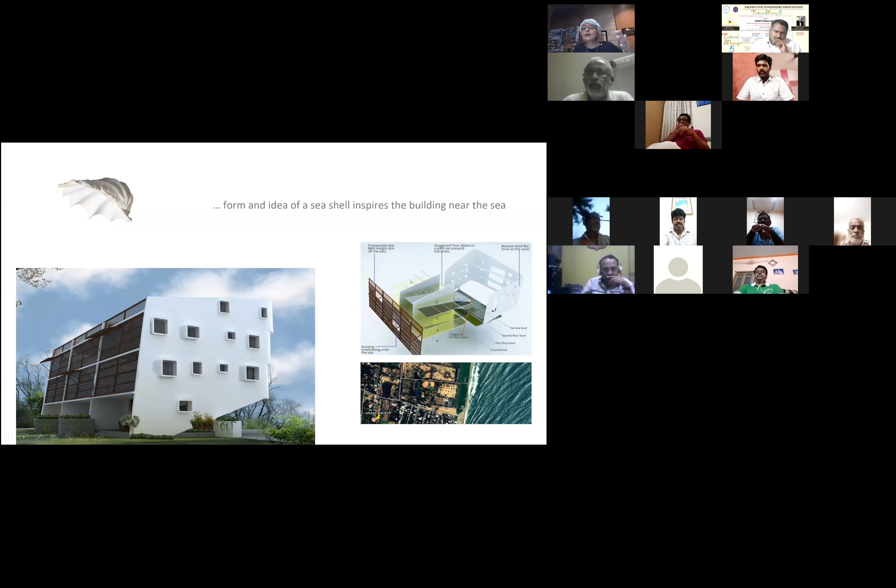That's the idea—in a seashell, from three sides, it gives the correct amount of light and air required, but the pearl inside is saved. Similarly here, we made a building with three sides; from the south and the west, where we get a lot of sun, we made the masonry with small windows. But facing east, which is the beach, we made a lot of glass where we get the sea breeze and everything.

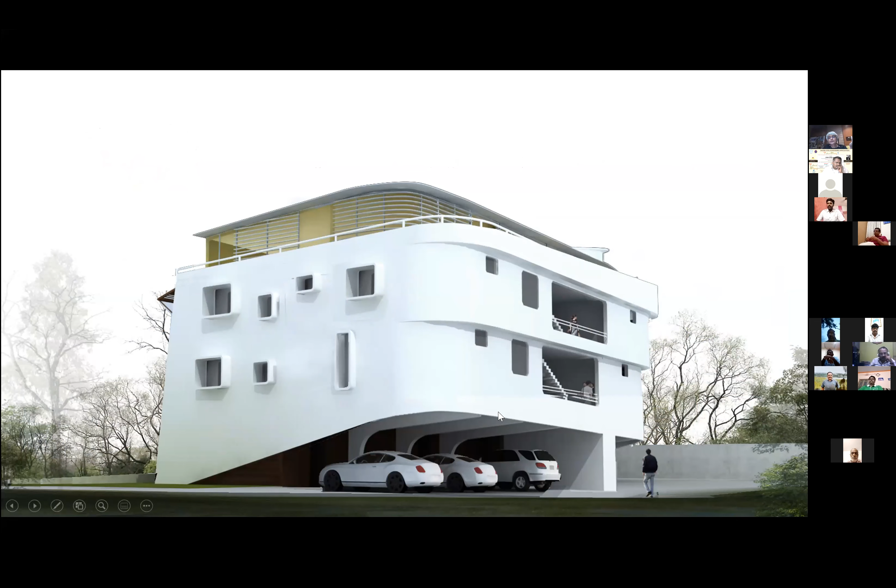To make that happen and give this feel of a shell, it was very important for us that we do not have a column at the end. That was a challenge we created for ourselves, and we wanted some part of the building to just cantilever. In this 3D model, this column is here, but the column didn't happen and we cantilevered the portion—that's something which actually gives the spirit to this building.

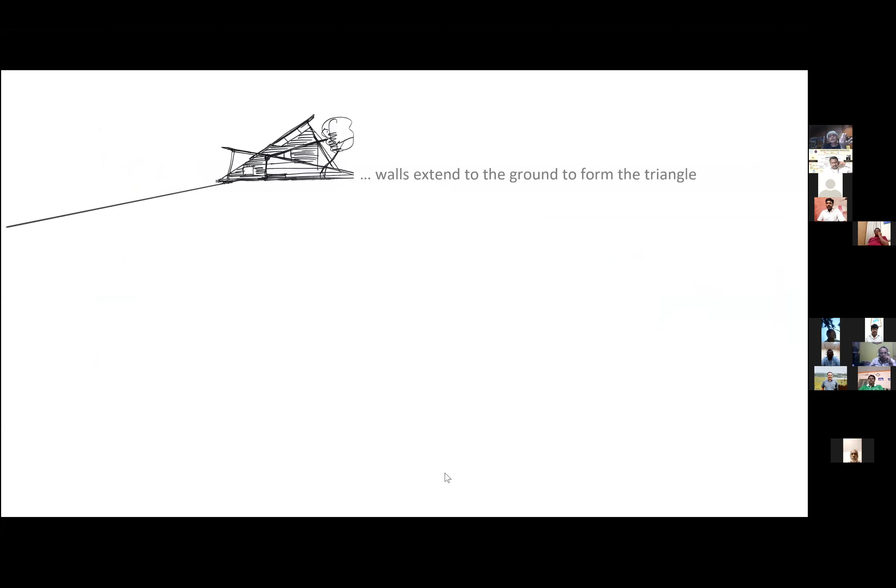This is a small house we did, like a farmhouse—a simple house with a traditional setup, masonry walls and a light roof. Traditionally we had a thatch roof or tile roof, but here we did it with a roofing sheet. What we did here is extend the walls and complete that triangle, so it got a new form.

Today it's like—we call it House Triangle, it's on our website. Every semester I interview students when they are joining our firm, and we completed this 15 years ago. Every student tells me, if I ask them why they want to join Maya Praxis, they only talk about this project. I don't know—I think it just still has that quality which inspires young students.

This is another project—we did a competition for the Indian Music Experience, a museum of music. In a normal project we would do standard grids—grids are very important to us—so we took the idea of doing a different grid. We divided the site into seven parts, like sa re ga ma pa dha ni sa. Then, like a musician chooses what raga and which note to pick, we made a lot of combinations and picked one grid, which inspired this plan and then the shape. That's how the design happened.

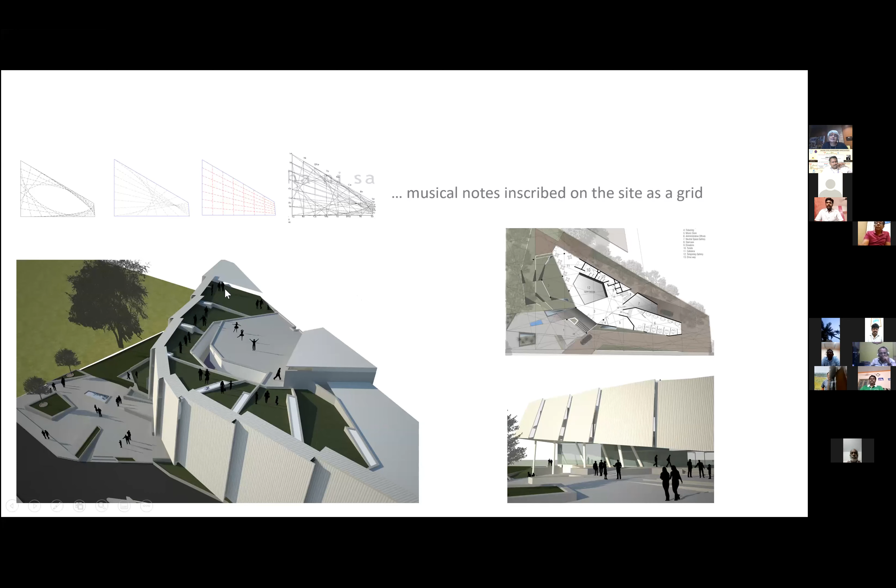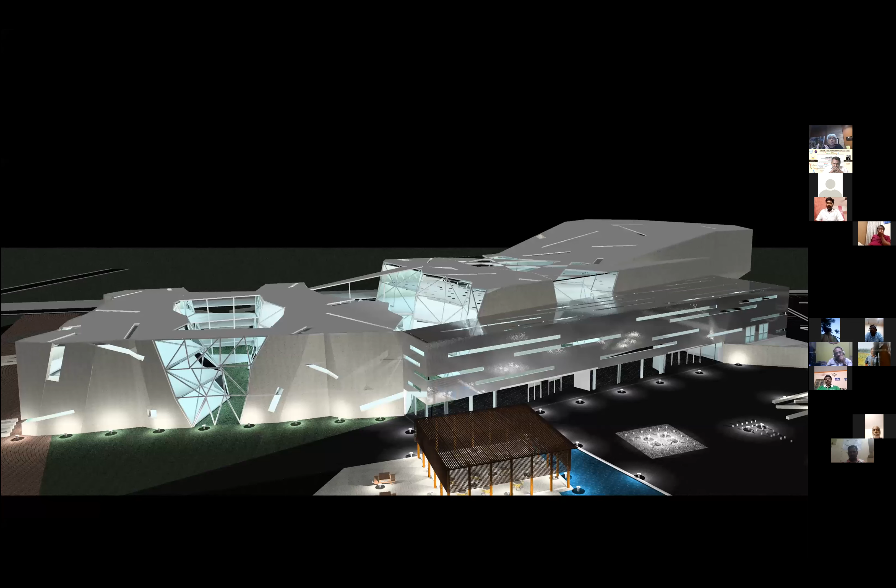This is another competition we did for a lighting museum in Bangalore. Here, what we did is get inspired by the geometry of crystal. Because it was a lighting museum, and light had to be celebrated and come alive in everything—through material, structure, function—we got inspired by the geometry of lighting poles we see in our city, which for us matched the geometry of crystal. We designed this museum with three crystal courts, but overall the whole thing was inspired by that structural geometry, and that's what made the design happen.

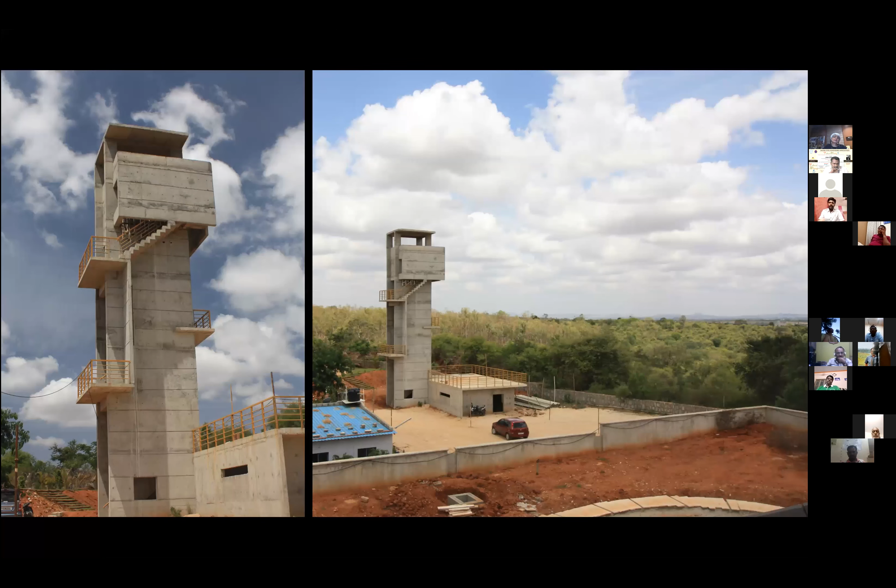These are two water tank cum watchtower structures which we did in concrete. Just simple shear walls, with steps to go up where there is a water tank. This was for a large house where we also gave access to go on top of the water tank, so they could go up and look at a forest right next to the house.

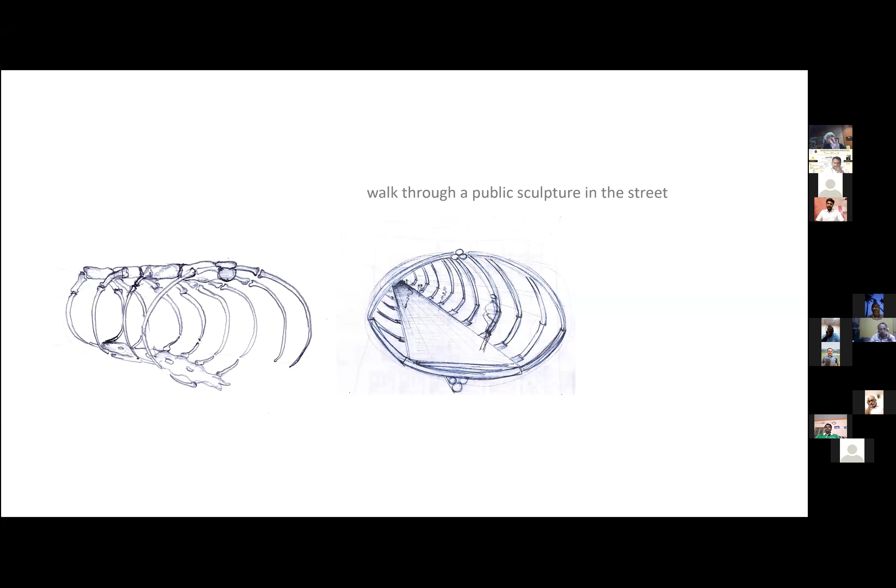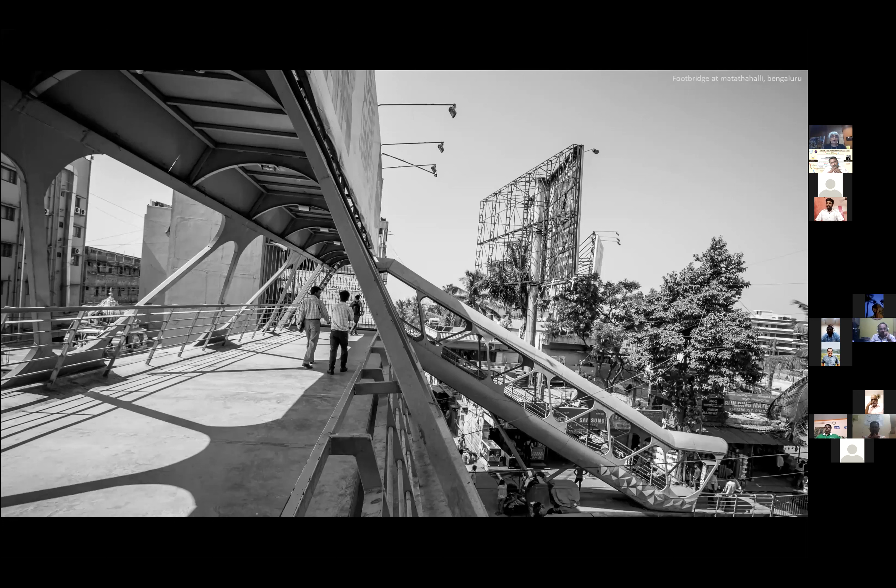A lot of these foot-over bridges cover the sides with hoardings. Here we convinced the BBMP and the client making this that we would take the hoarding up above instead. So what you see above here is the hoarding, and then all these different bridges have different shapes - this one is triangular, the other one more diamond shaped. These are the different geometries we made, and it's also about how the person experiences the light and shadow that forms on it.

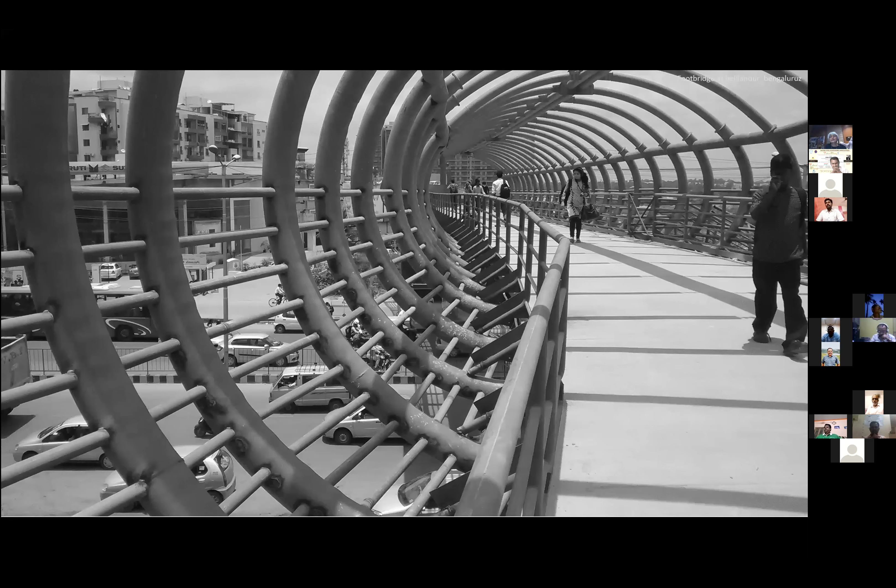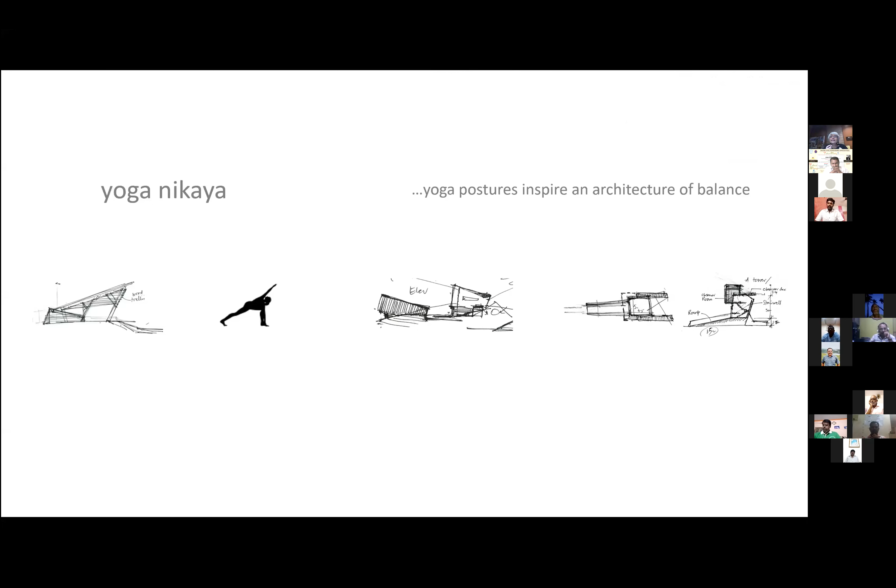Now I'll explain this project a little bit more in detail. This is actually a yoga place called Yoga Nikaya. It's a wellness retreat where people go to learn yoga and do meditation. Here too, our idea was that the structures are inspired by the yoga postures.

If we stand, that's the most stable structure - like most buildings, when we are standing, the gravity is all vertical. But in a yoga posture, while doing yoga, we have to find that fine balance, which needs a little extra effort to be balanced. I think most of our buildings here took that idea, and the angles and planes we worked out in this building are inspired by that. One of the buildings is actually inspired by the Bhujangasana.

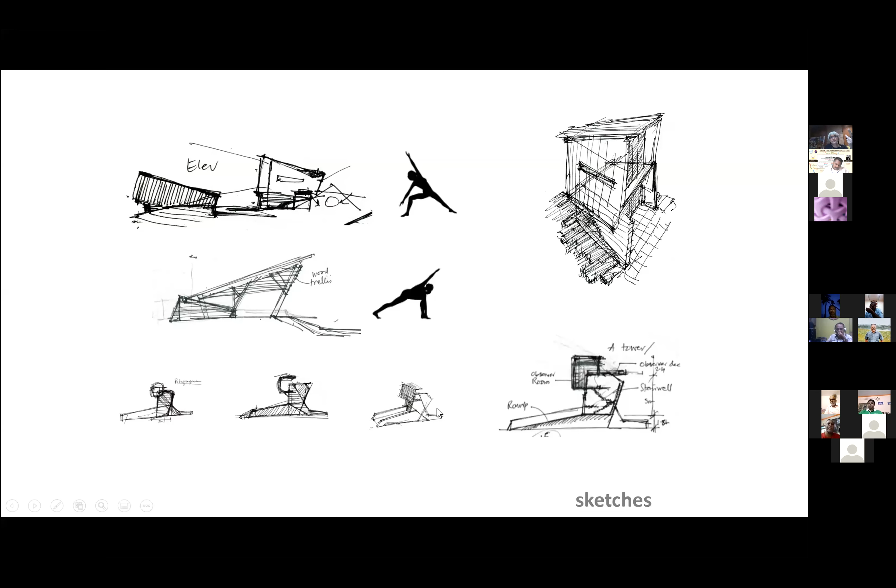So in Bhujangasana, with the legs back, hands front, the person just looks up to the sky. That's what translated into a building which is like an observatory. It became almost literal. We were looking up at the sky, and there was a telescope the client had put up, and there was a watch tower, kind of a water tank there for the whole campus, and an observatory on that. So that was inspired by Bhujangasana.

And it's a wellness retreat where people come for rejuvenation of body, mind, soul. Like 7 acres of land with all fruit orchard, flower orchard. We took only the area which had no vegetation, we left the farm as it is. We made a compact design where we had a plaza with meditation hall, yoga hall, reception, few cottages, like 8 cottages along a street, dining hall, and that observatory.

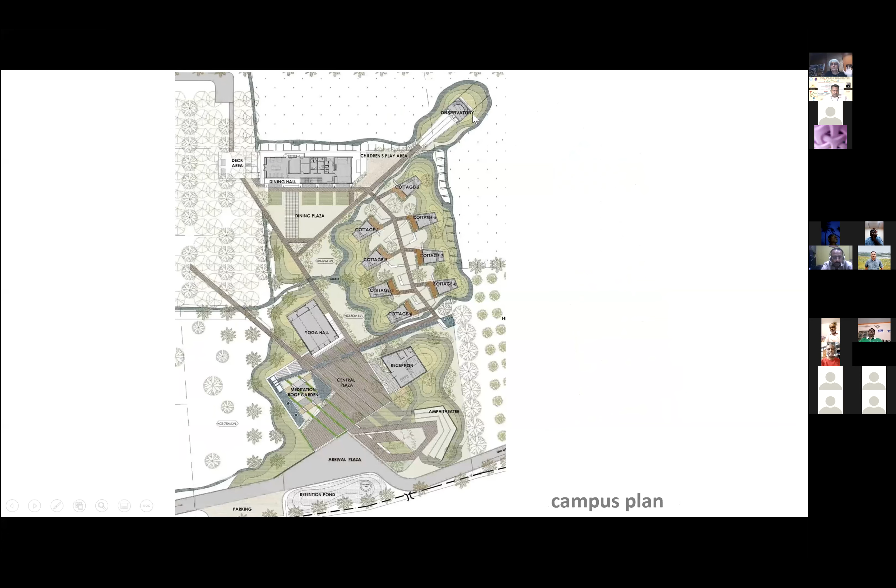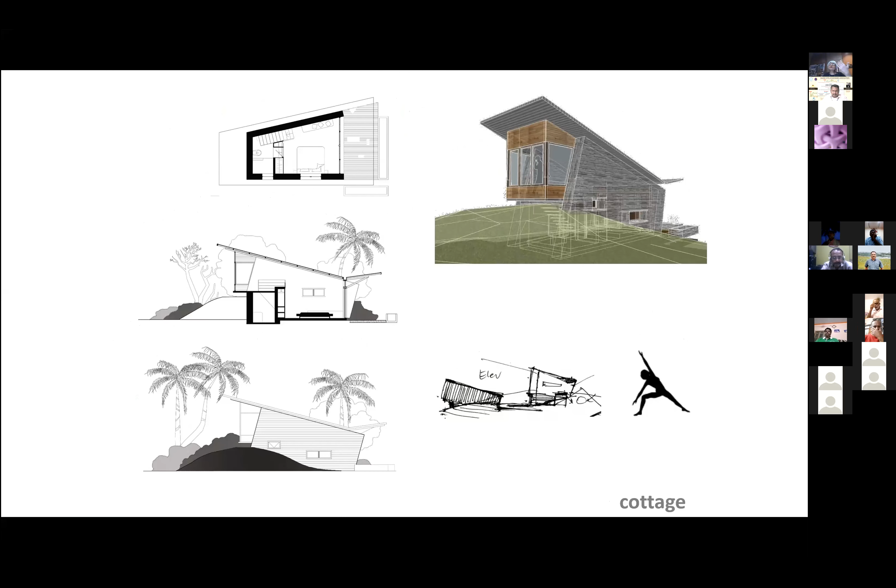So here, if you see, most of the buildings we designed have 2 side walls which are the masonry walls. The other 2 sides are in wood and glass, so that's where the light comes in. And the roof is, again, roofing sheet.

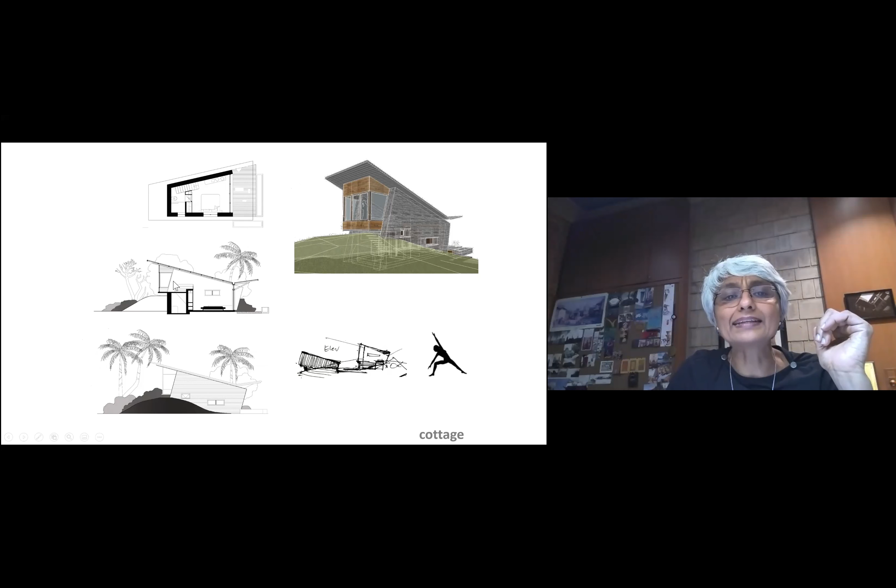This is the cottage where we put the toilet at a lower level, and with less height we had the bed, and then above the toilet, with a ladder to go up, we gave a space for somebody to do yoga and meditation. That's what that cottage is.

And we created a mound so that from the other side, you don't feel that high height. That's the street, how it sits in the landscape, all the cottages.

The yoga hall - here again, we know we have to face east while doing yoga, so it was aligned with the east-west direction. And we did these 2 masonry walls, but the inside, being a large hall, we wanted a full column-free space. So we designed these steel columns, these column portals, which made the space completely free. And this is, I think, the closer view without the roofing sheet of the structure.

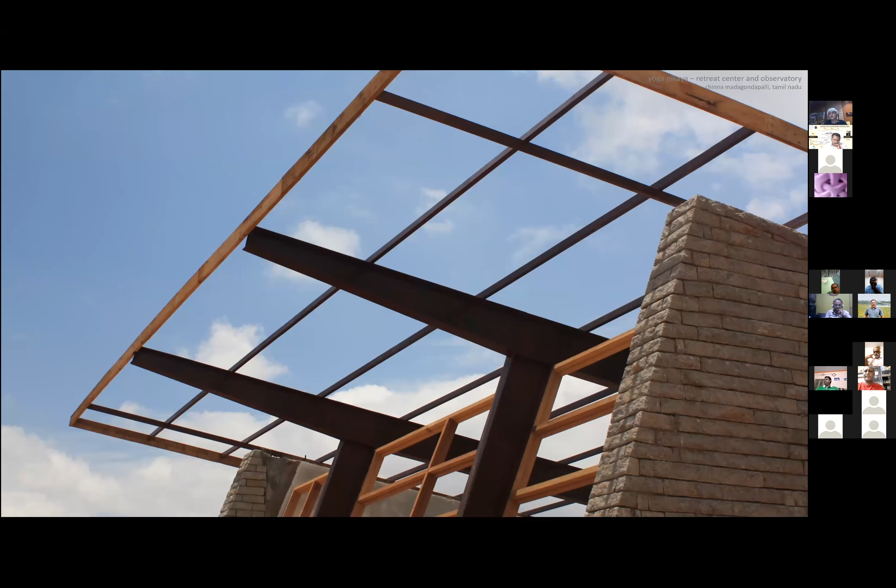And that's how it is, where the side walls are in masonry. And if you see what the stone is, it's actually a composite wall with a concrete block inside. The outside is this chapri stone, like pillars used for fencing, which was available in the area - this is near Hosur. We just used that as masonry, so it's a composite wall. We didn't want to clad it, but we made it a composite wall.

And that's the space from inside where we have this beautiful Kadapa stone flooring, polished. And being a roofing sheet and being in a hot climate, we had to give insulation, but we used this packaging wood - you know, what you get deal wood in, in kgs. We used that with plywood, and then we put these small pine wood reapers, and that's what became the ceiling here.

The reception hall - so all the language, all the buildings followed the same language, and all of them we did this kind of butterfly roof. So the roof, normally we'd see the roof is like this, where the top goes up. Here, what we did is all the buildings had the roof like a butterfly, which made the rainwater harvesting really easy, because we had one point where all the water comes, and from there we collected all the rainwater and recharged the thing. I'll tell you how that works out.

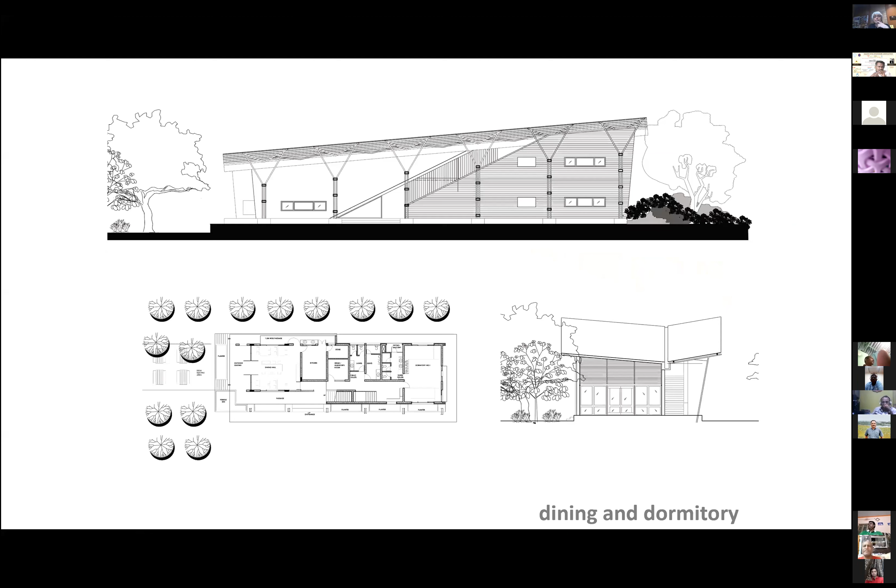The interiors, the dining hall building - so this was one of the larger buildings. We had 3 dormitories and a dining hall, where again we designed the front of the thing with these thin columns, which support that roofing sheet up there.

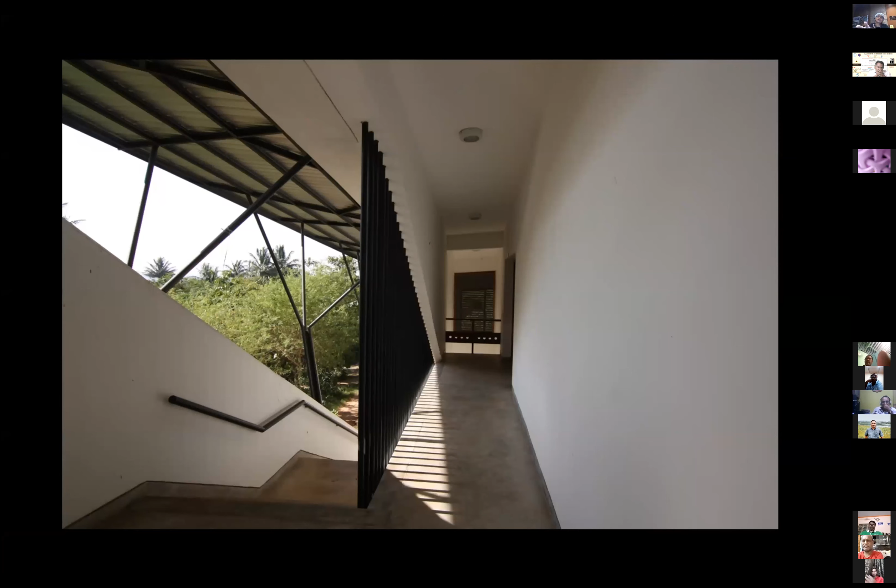So here what we did, what you saw, there was a stone wall and a white wall, and in between we put a staircase inside, and that's what separates those 2 walls.

This is the observatory cum water tank structure. So there was a water tank, and we didn't want separate different water tanks on these separate buildings, so we had to just create one large separate structure where the water tank could be placed. And that's what this is.

So when you enter, there is this staircase which leads up there. This is the water tank placed. Then we made - and later actually, which is not shown here, an observatory got added there. So that's what, and 2 shear walls on the side which support the water tank. With the steel structure, we had to strengthen it when we added the observatory at a later stage.

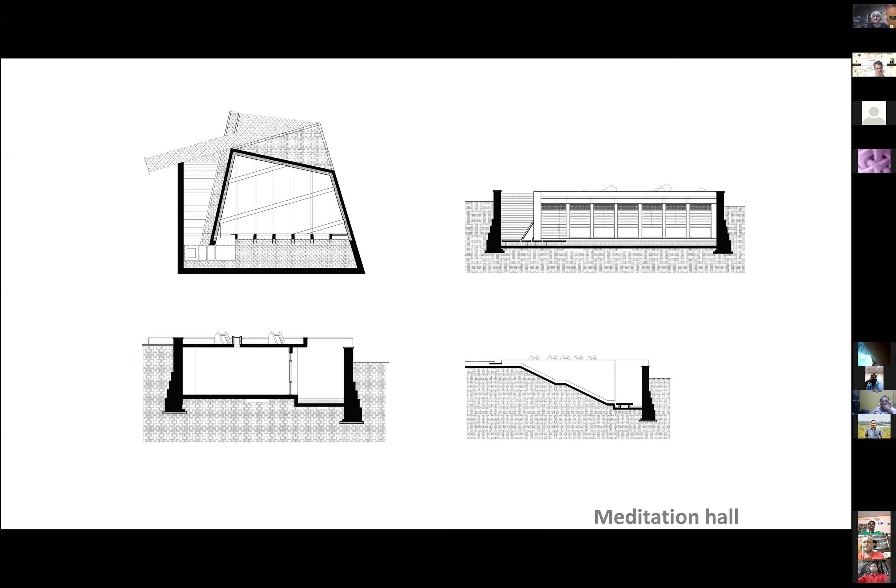That's the meditation hall. We purposely put it underground, because when we do yoga, we want to connect to the world, the sun, sky, everything. But when we want to meditate, it's about internal reflection. We want to feel and reflect inside of us.

So we thought we will take the person doing the meditation down underground, to a space where you go away from the world, and there you can reflect on your own thoughts. Slowly those thoughts fade away and you're in a different state, like a trance. That's the meditation hall.

Most of the projects we do, sustainability is very important to us. When it comes to using local materials and local technology, we try to do that. This project is one good example.

This was a farm when our client took it; the water used to come from the nearby village and they had to pump it up. What we did is a full, proper rainwater harvesting system.

There was a drain where water from the village was going right next to our property. We created a bund there and collected that water, which was still flowing toward the lake because of the site's location. Then we created channels like bioswales with recharging pits at regular intervals, directed to the bore well. Within 3 years, they became completely self-sustainable in water.

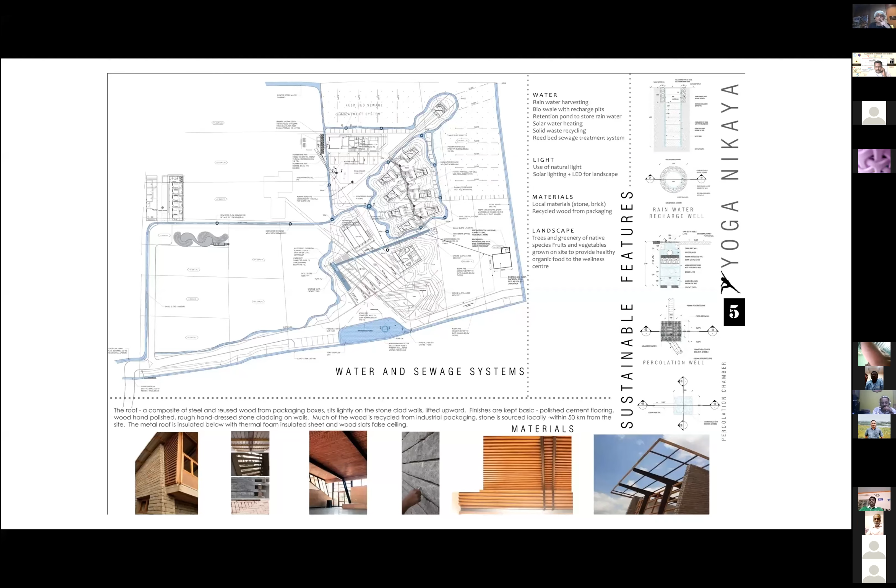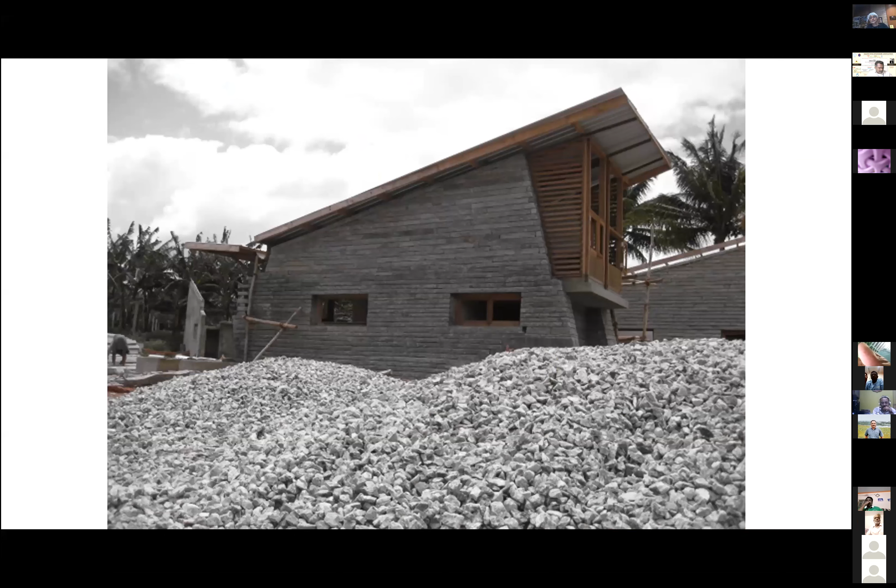Some of the projects under construction - as architects and engineers, we love this stage where one can see how many possibilities we have. It's interesting, the same material you see here is the same material you see on the finished building there. This is how the whole campus feels.

And finally, all these buildings come alive when they are used and enjoyed by the people.

Another project I want to explain is a swimming pool building for a school, Aditi Mallya International School. Here again, it's a steel structure.

Because it's a swimming pool building, we took the arced position of a person diving into the water - the swimmer's position - as inspiration, and designed the structure around it.

That's actually the elevation. And that's the covered pool, the finished structure.

What we've done here: it was a 22 meter by 32 meter span, one hall which we had to make for this swimming pool, a 6-lane pool.

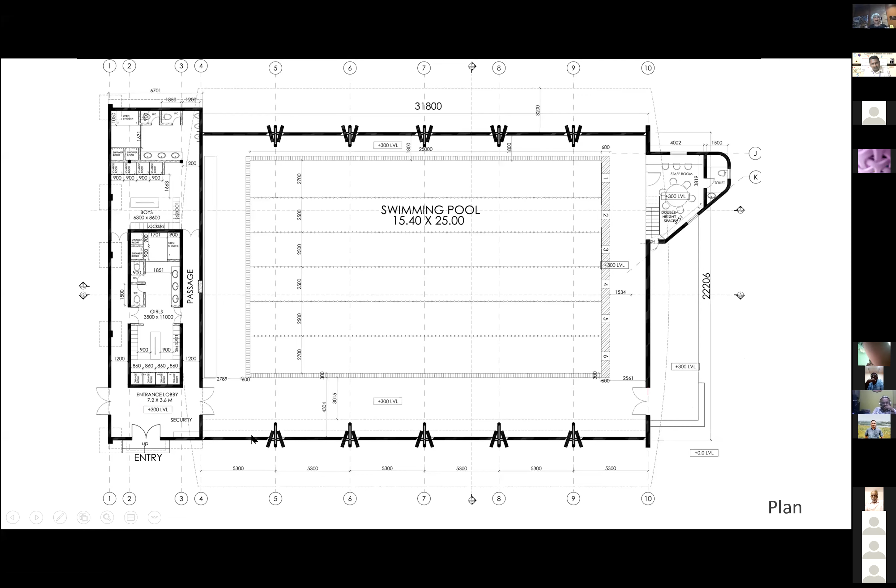To achieve that, the walls are at an angle, and we designed these two split columns you see here. That's also inspired by a person standing with hands up, ready to dive - so even the design of the column got inspired by that, with the split there.

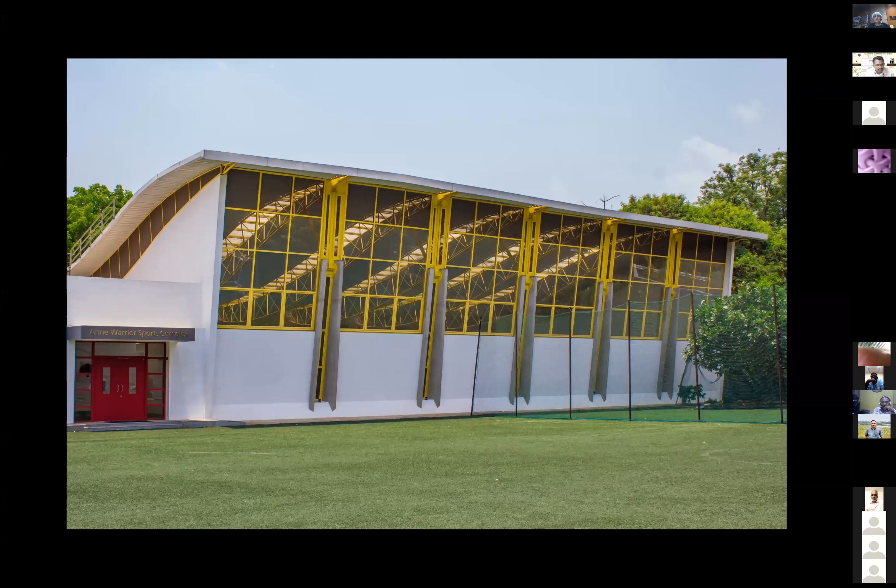That's how it looks in reality - the elevation - there was a field there, so we had to give this wall so dust would not go into the pool. But the split helped us create a slit where air movement could happen at the level where people were swimming.

Above, we gave mosquito mesh so ventilation could happen, but up to a certain height we gave glass so dust wouldn't go in. What I'm explaining is, when it comes to climate and making the building inhabitable without using much energy, we try our best to work it out with the structure.

This bow-shaped truss was designed because of the swimmer's position. The 22 meter span we took with this bow-shaped truss was worked out based on how it sits on these two twin columns.

We created the skylight, which celebrates the bow-shaped truss - it celebrates the light, celebrates the structure.

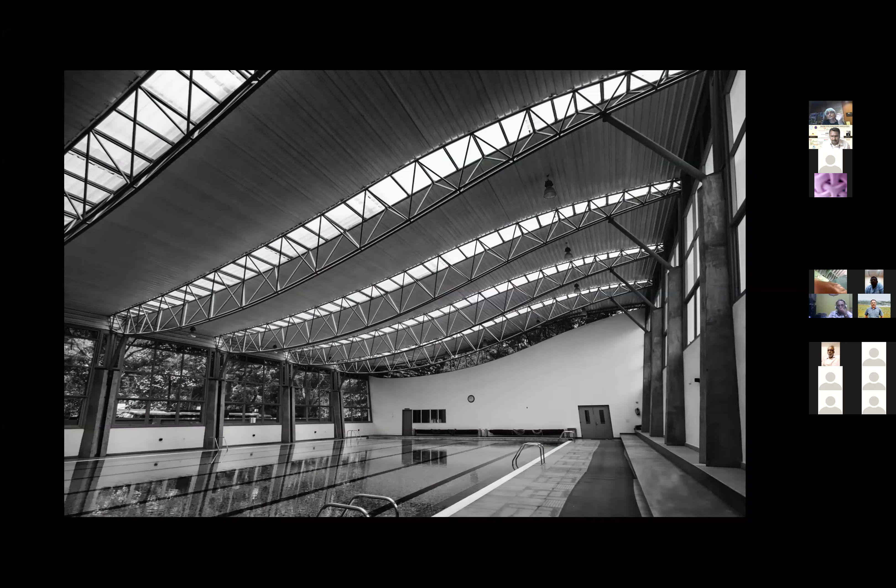Being a swimming pool, we wanted it heated. In Bangalore, for a school, they want to teach swimming all year round, so they wanted to use diesel. We said no, we will do a solar heated pool.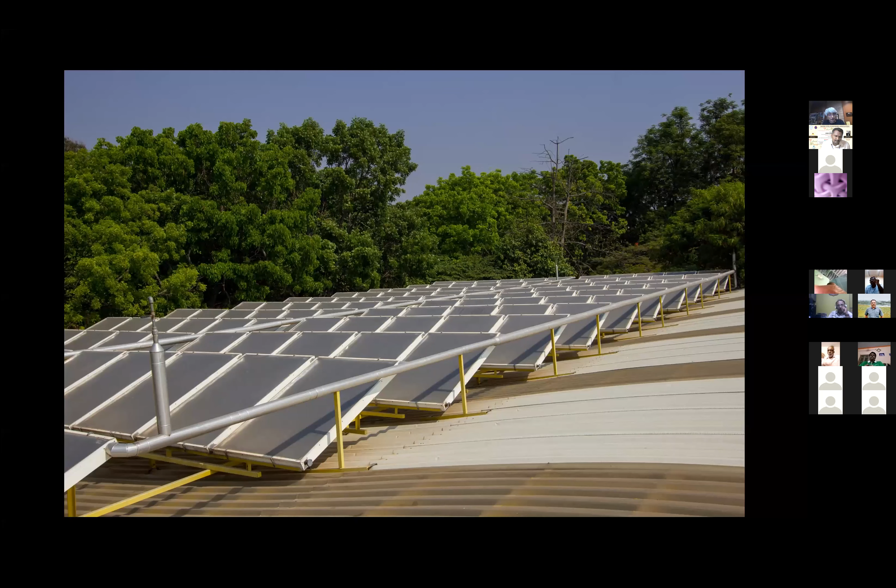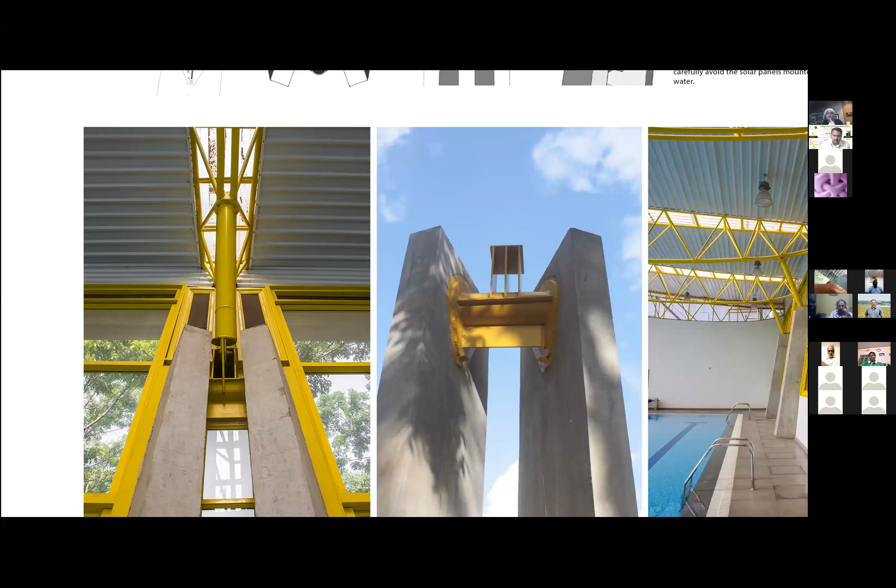For a school like this, we did 120 panels for that whole large system, and we had to work that out with the bow-shaped truss to take another structure on top where the panels could sit. We wanted the columns to stop at a certain height, with a steel structure taking over above, making the structure look lighter.

Otherwise, going these columns all the way up, they look very heavy. For us, we had to design this joint. We designed with the structural engineer how the whole load from those trusses comes to this joint and then gets transferred to those 2 twin columns. When you have to design like this, we do really detailed drawings to make that happen.

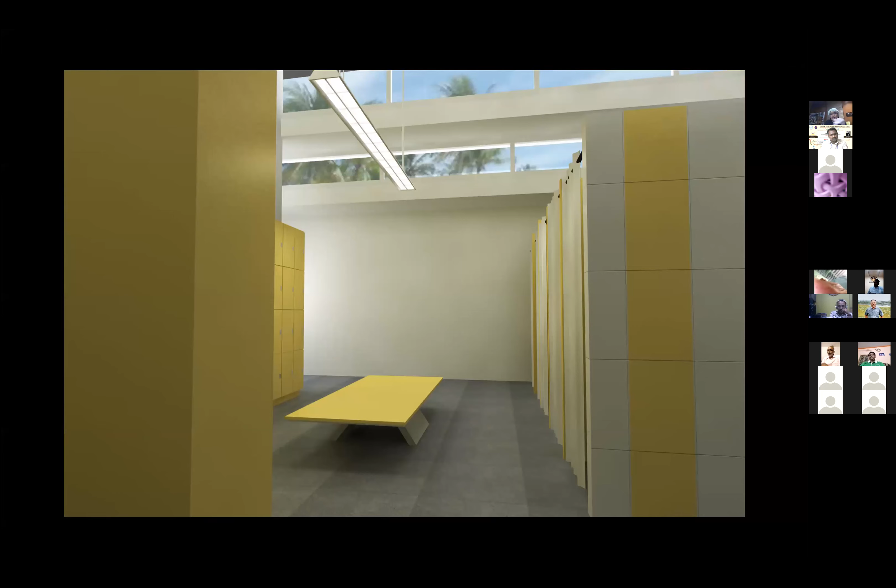This is the change room, which we did along with the pool. So yes, I think for us, if you ask us, the client asked us to do just a shed for swimming pool. But why can't a shed be beautiful architecture?

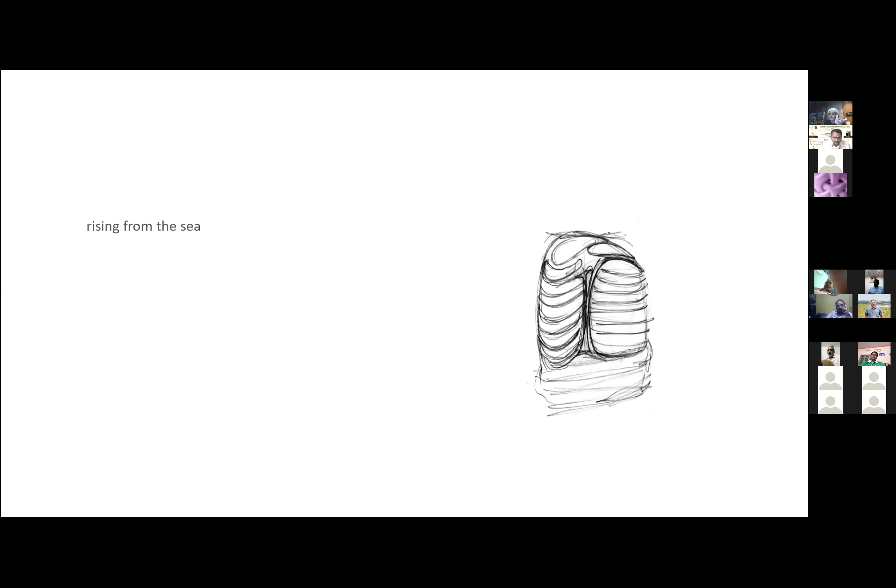This is another project what we did. This is in Bahrain, a 4-star hotel. Bahrain is an island, so we again got inspired by the sea creatures there. And the client said, we became these foreign architects, like how in India we have architects coming from Singapore. So for Bahrain, they said, we are getting an architect from India.

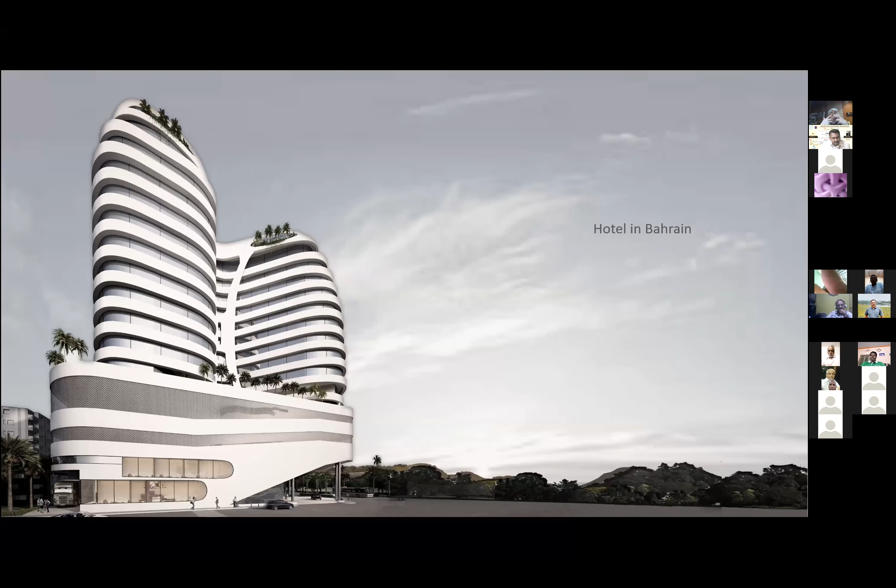We want an iconic building which looks very different from what the normal buildings in Bahrain look like. So that's the brief we got. So we said, okay, we'll give you an iconic building. And we designed this building inspired by that. We said we will do this free form building.

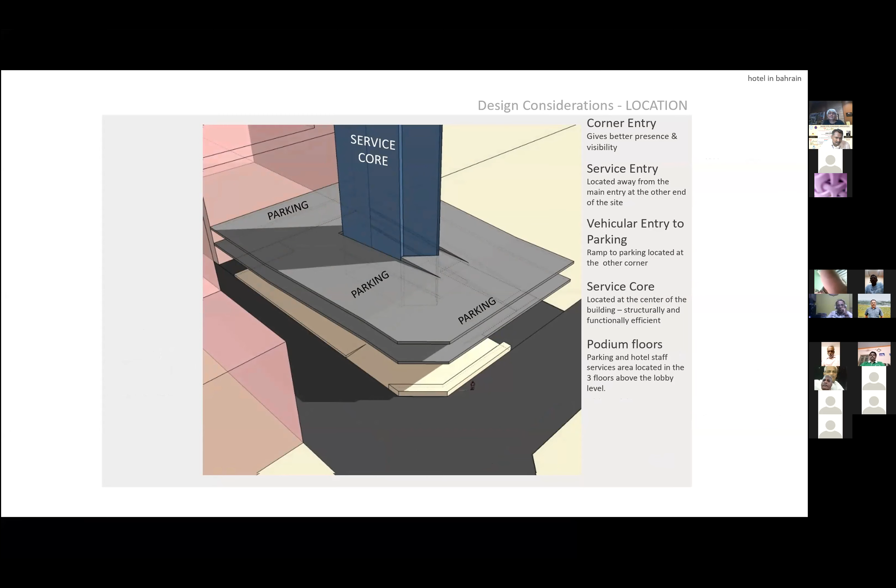And there it's like a downtown feel where you can build all the way up to the edge of the property. It's a small site, 20,000 square feet, where we did ground floor lobby, 3 floors of parking, then the podium with swimming pool and the tower.

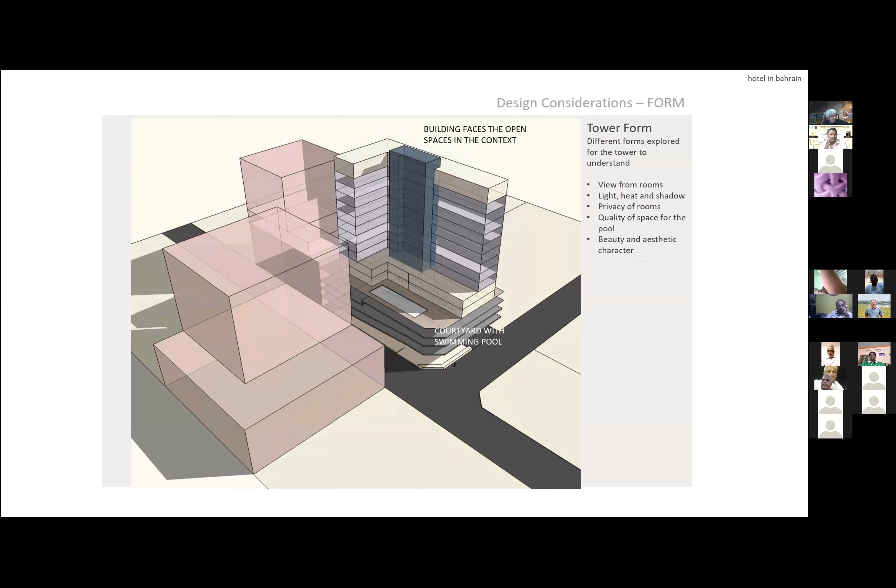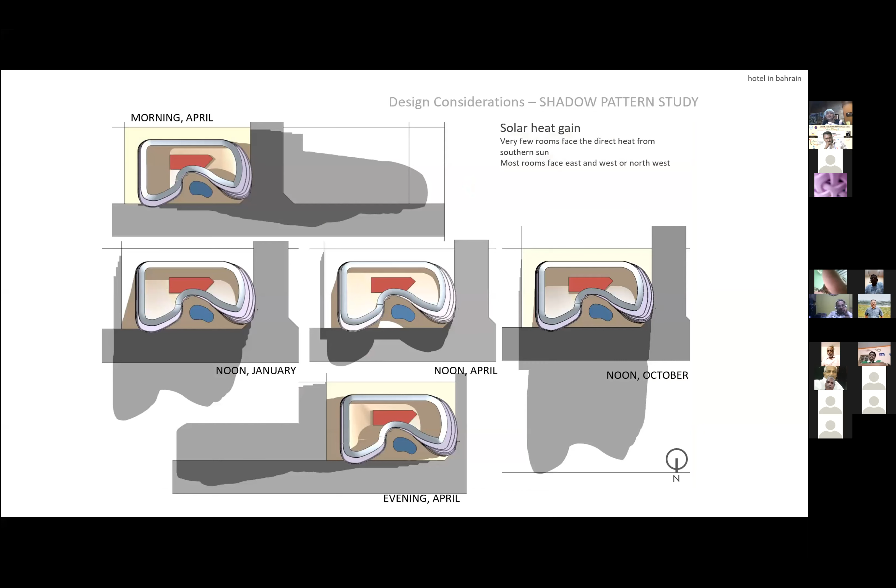We looked at different shapes to see what would work to give shadow to the pool, because there it's so hot, so the pool should be in shadow. That's how, after a lot of analysis, we came up with this form.

For us, this was the first time we were working in Bahrain, and we understood there we can't do a basement. It's an island, you're sitting on land which is really unstable. So the structure was all pile foundations, which went deep, and all PT slabs.

Completely, the whole structure was done in PT slabs. When we designed a building shaped back like that, we had to work out what happens to that column, how do we support it, and how many columns we have. Eventually, as these 2 columns went up, we made them slant in the last 3 floors to give us that shape.

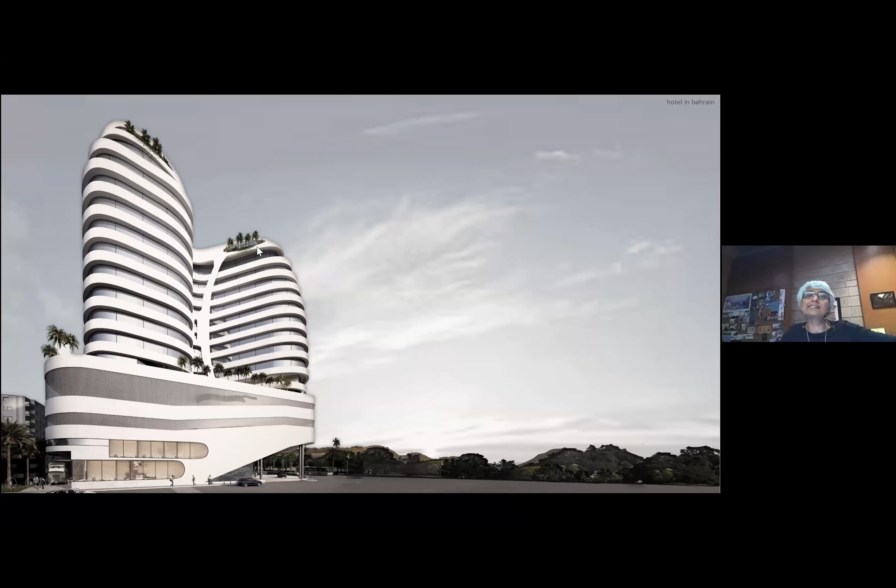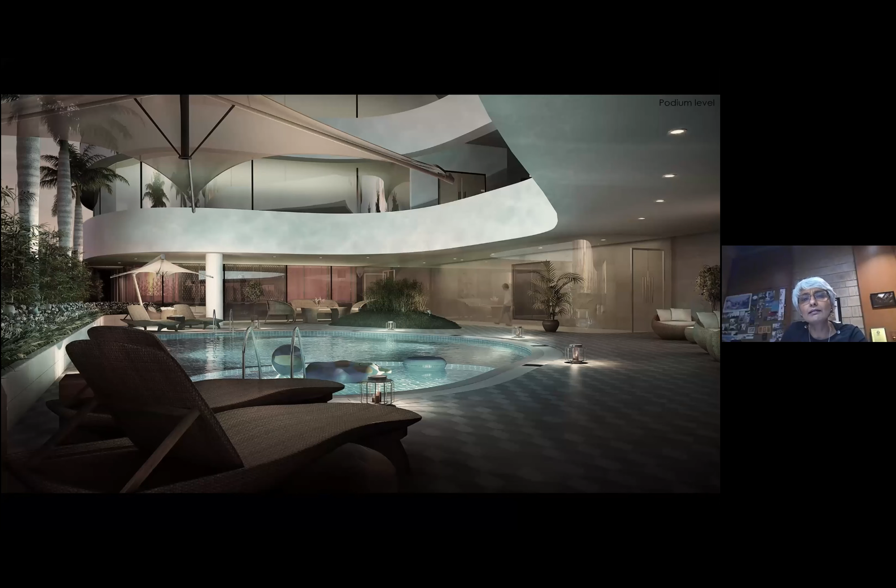So yes, that's just the lobby. And even the interiors, we do. So we also take the same idea to the interiors. We worked on what we do in architecture, trying to take the same idea and bring the experience to the interiors as well.

I'll skip this part. So even in interiors, there was a column in the middle of the restaurant. We said, okay, why not make a mushroom kind of thing out of it? And that's the finished building, what you see.

Even if you see what we did, most of the buildings in Bahrain, they'll be like this - there'll be no shelter. It's actually hot, 50 degrees, but very few do anything to shade the glass. So when we did these huge PT beams, which also worked out for the form, they also shaded the glass between the 2 floors.

This is one project, I think, for a developer. Here I worked with your members association member, engineer Satish. He was our structural engineer. And literally, I think we had a tough time.

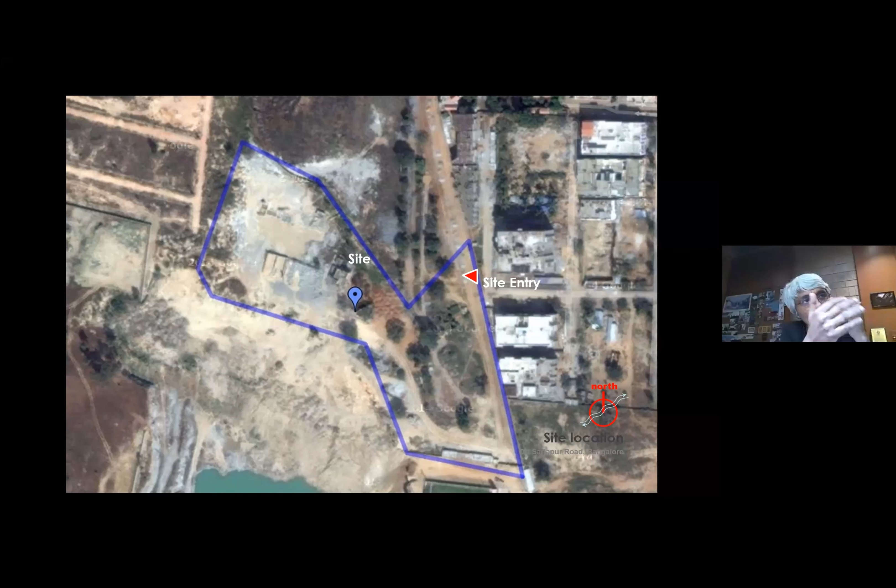It was a problem site because the site was a quarry earlier. I think when the developer took that site, he didn't know how many problems it came up with. Once we did the soil test and everything, there was a lot of filled up land - somebody earlier had filled up a lot of places. So along with Satish, we worked out the structure for this.

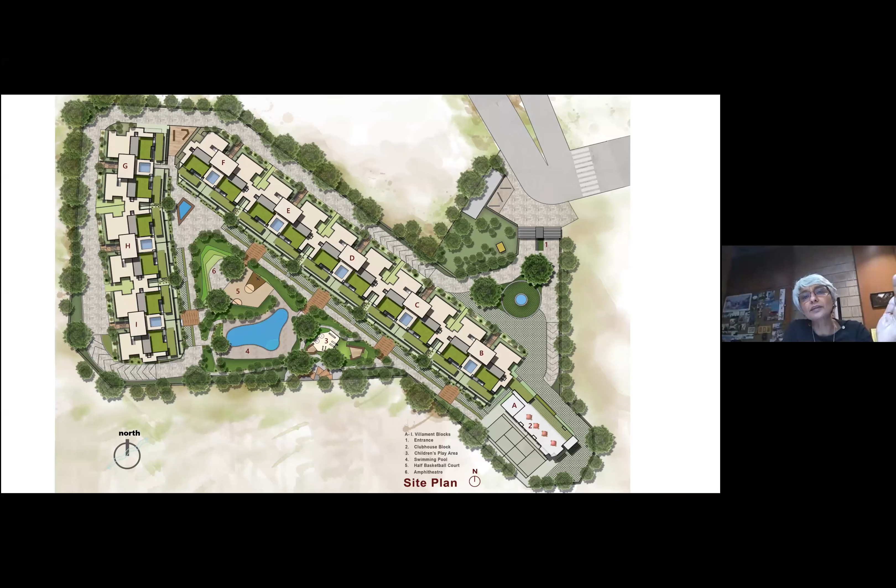The client thought he would do these towers because it was a very odd shaped site. We said no, we'll work out something where we'll actually do this 9-story building, which is a continuous building. He wanted duplex apartments, so we did these duplexes.

What happens if you do duplexes above like that is you'll get 1 floor with 4 doors, and then the next floor you'll get no entrance door. So we said no, we'll introduce 1 single floor apartment here, and then we will alternate, so we'll get the entrance to this side here, and the next floor would get that.

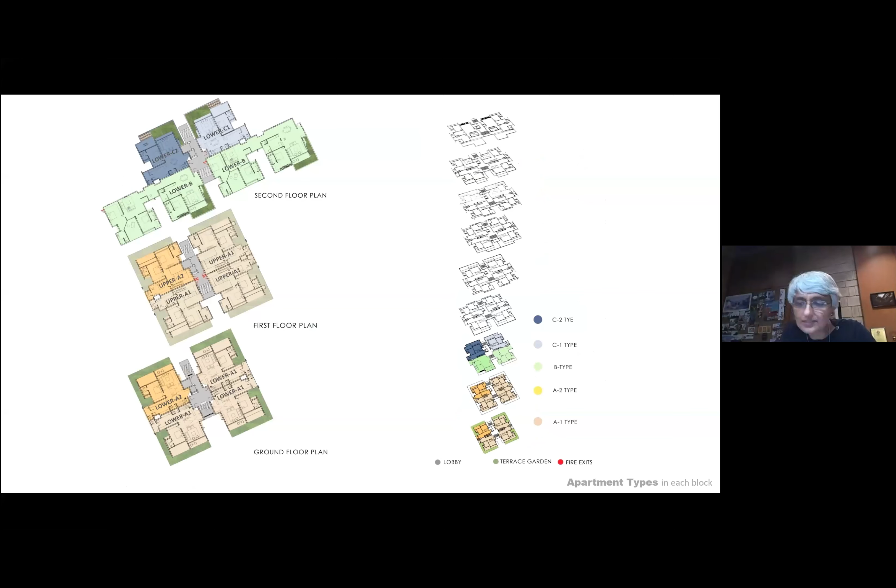I think Satish would have cursed us for doing it, because every floor became different. Typically for an apartment structural drawing, every floor had different beams, and there was a double height in every duplex apartment.

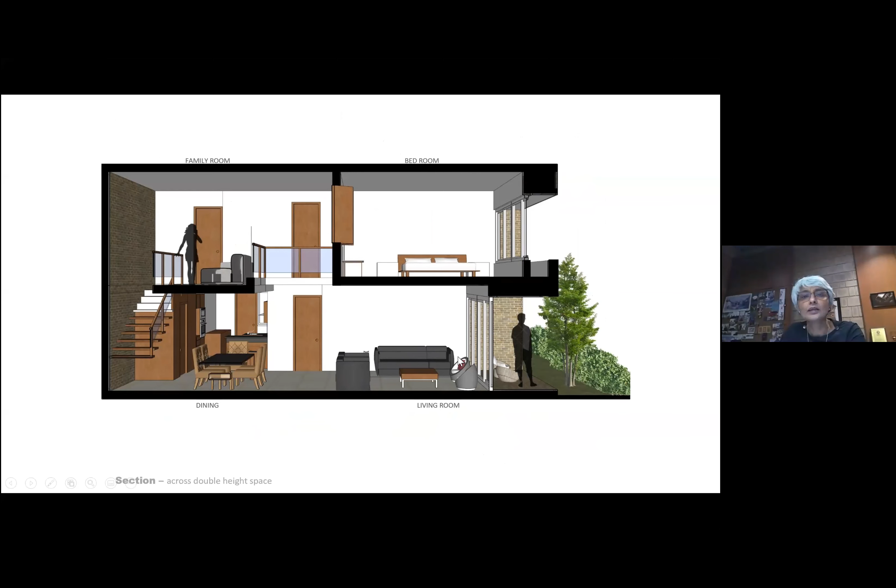So what you see is this double height, alternating in each floor. We introduced steel beams inside that double height so we don't see a beam there. I think we achieved a very beautiful apartment after that. We didn't want any drop beams which would affect the double height, so we introduced steel beams in this 9-story structure in the middle.

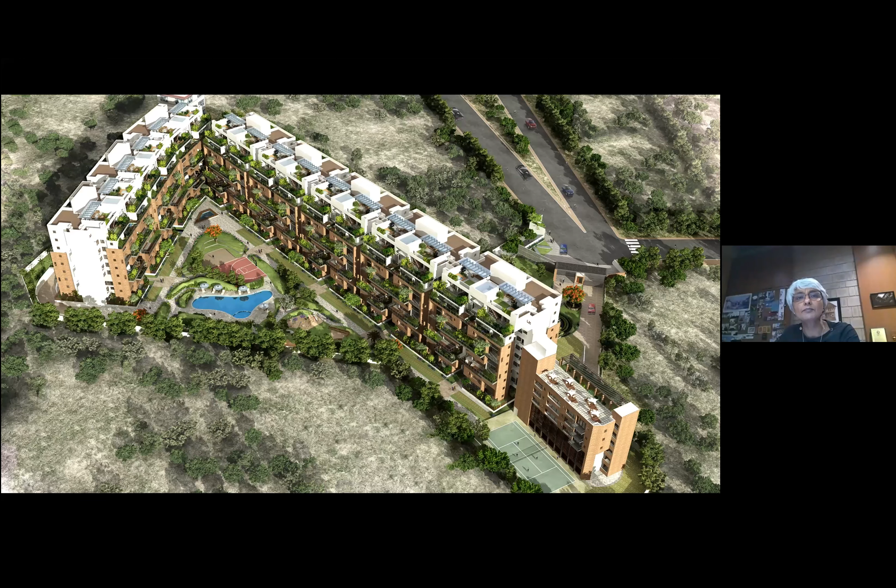And that's some of the 3Ds of what we did. The building had to recede back because the client wanted terrace gardens, so we introduced sunken slabs and a terrace garden to each duplex apartment.

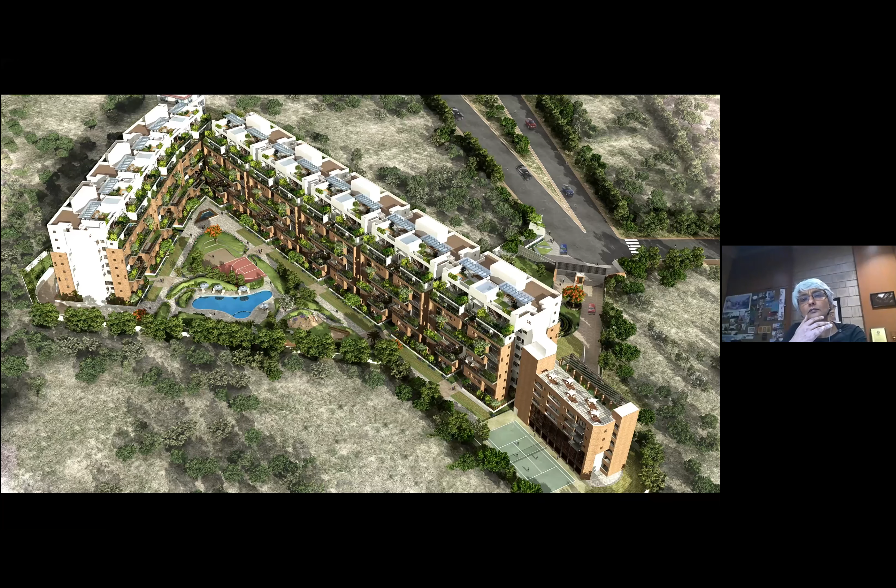Finally, when the building is built, the people who inhabit this space don't think about how much pain an architect or engineer goes through building this. For them, what matters is how the building is finished, what flooring or furniture there is, whether the toilet is functioning or not. But yes, we do have to make that work as well. There's a lot of work which goes into making that structure.

So this is how the building has come up. It's under construction right now. The structure is complete.

Now this is another multi-purpose hall we did, in Jalandhar, which is in Punjab. Brick is the material which is beautiful and used very well there; all the buildings are made in brick. So we wanted to make a brick building, but being a multi-purpose hall, we wanted to do a steel structure.

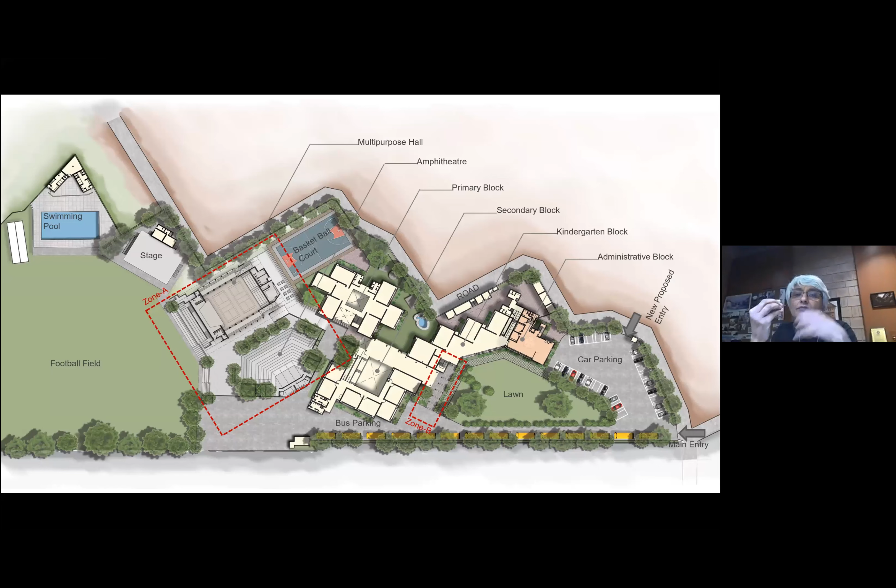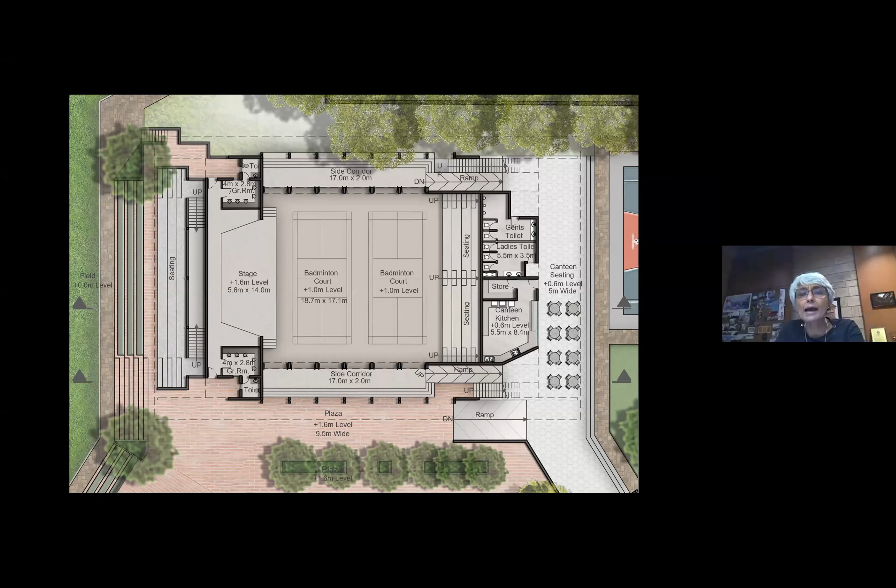So we decided to combine the two really well. It's a hall for a school where they wanted performances to happen, but also wanted it to work for badminton, chess, TT table, even judo, karate, and other activities which happen in school. So that was our first thing, where we worked out how many people could sit.

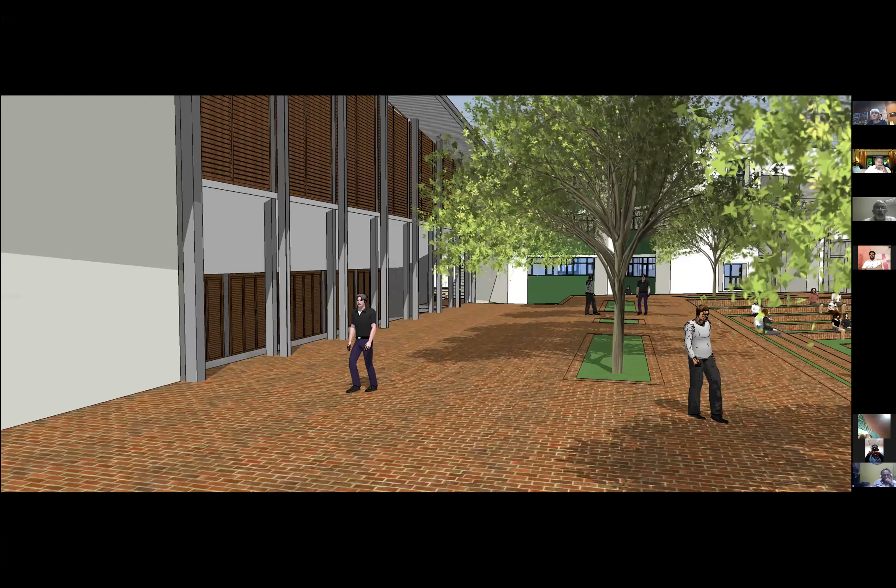I'll explain in the section. So that's where we did the stage, the flat area where badminton could happen, then the stepped area behind where the audience could sit, and we also did two galleries on the side, because if the courts were this way, we could add more people sitting there to watch the badminton happening. Along with that, we designed this amphitheater.

So yes, we did it in brick. Here again we tried our best to make this building work, being in Jalandhar, where it goes up to 45 degrees in summer and down to 3 degrees in winter. So how do we make a building where students can use it throughout the year?

We came up with this idea of a 3-skin system. We have a jali, then we have windows, and then we wanted to do a blackening out because it has to work for performances. So that's what we did here.

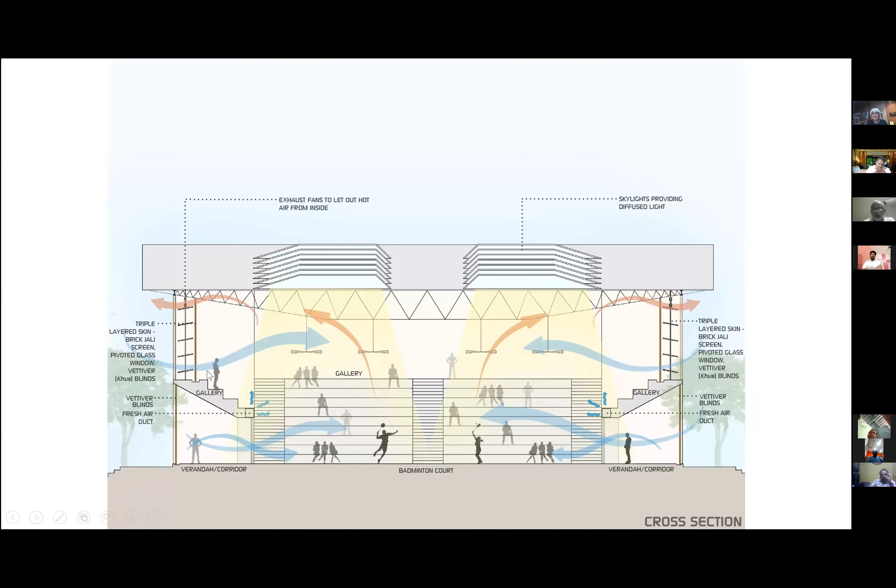So finally the client had to air condition this building, because if you have to fit 600 people in summer, it was impossible without air conditioning. So we did air condition it, but the idea was that it's used only when we have performances. Most of the time, when students are using the hall, we do not use the air conditioner.

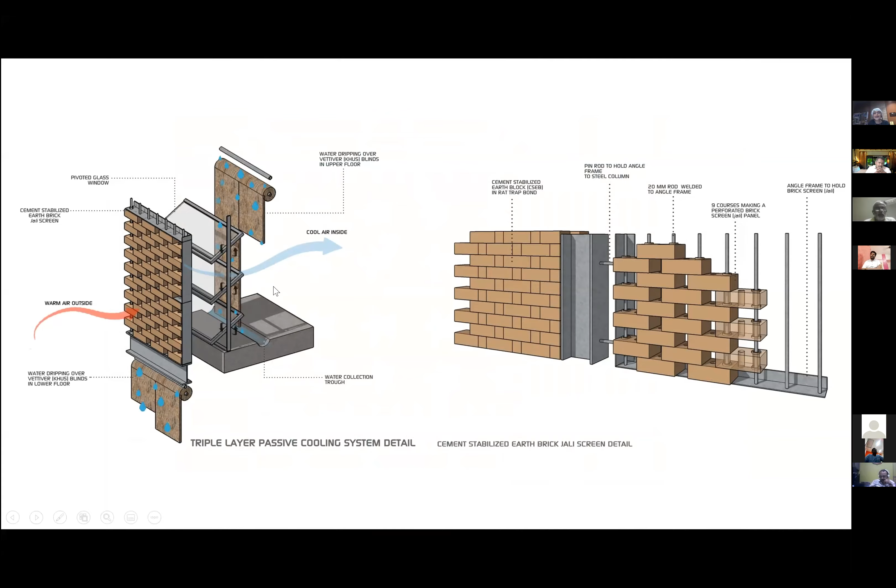This is what I was talking about, the 3-layer system with the brick jali, then windows. People could open the windows in summer to let ventilation happen, but close them in winter so no air goes through and makes the building cold.

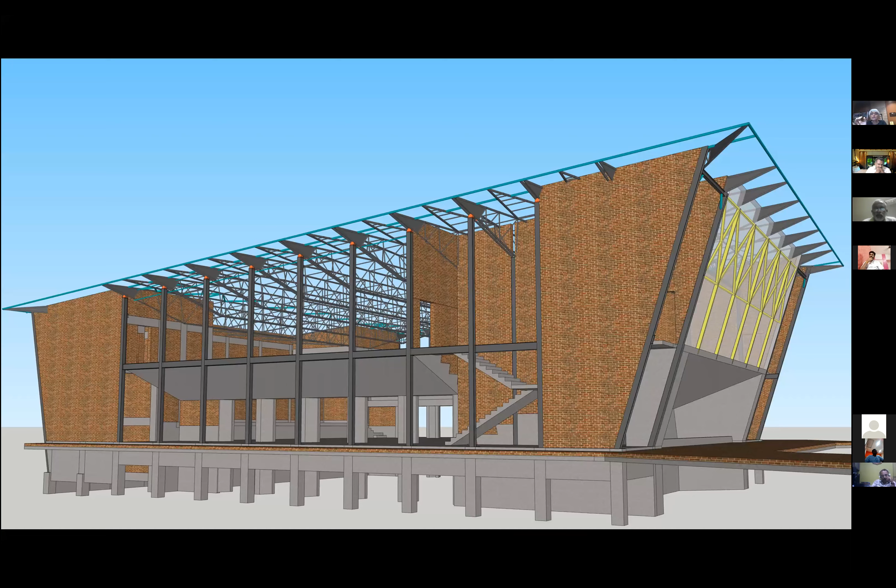So these were the steel trusses. The whole building is a steel structure, steel columns and steel trusses. Each truss is designed individually; we do proper SketchUp models of how each joint is designed, because in most of our buildings we leave the structure exposed. Even where we did brick, the brick is between the steel columns, so you can see how the joints are designed.

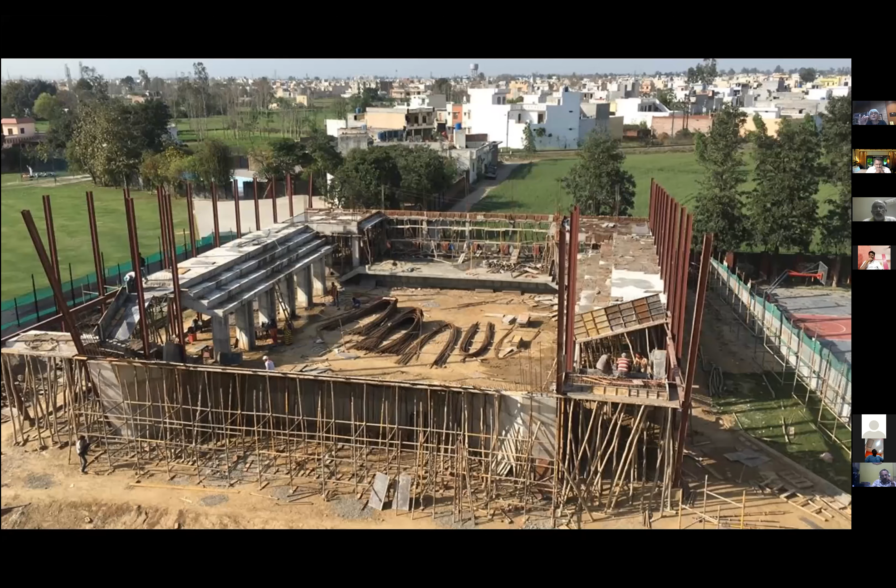That's the building under construction. Most of it is steel, which we use for the columns to support, and there are two side galleries.

Madam, your voice is audible. Madam, your voice is not audible, madam. Sadish sir.

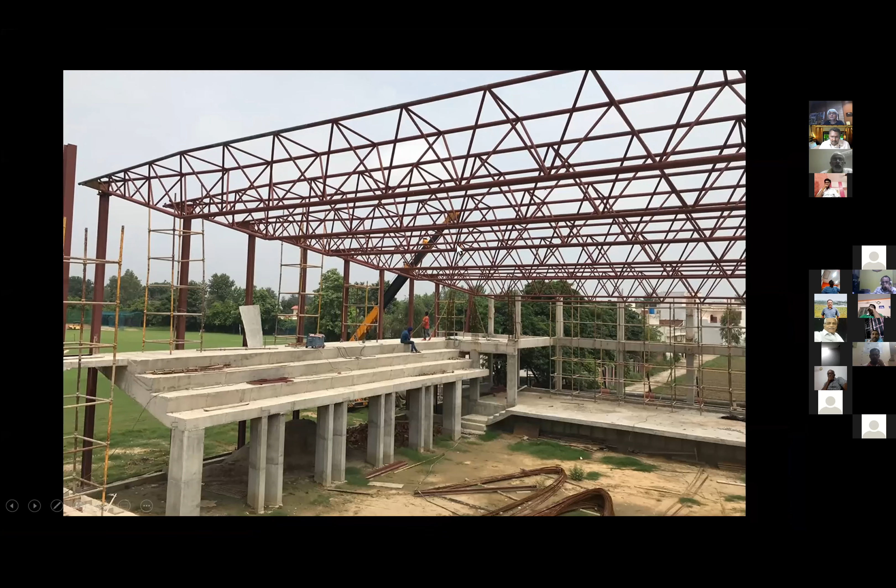That's like a concrete wall. That's some of the pictures.

I'll go quickly. We left the steel trusses open, but to make it acoustically sound, instead of doing a false ceiling, we did these acoustical baffles, which lend a proper acoustic environment for any musical performance the school wants to do. Now it's almost complete, like 90% complete, the building.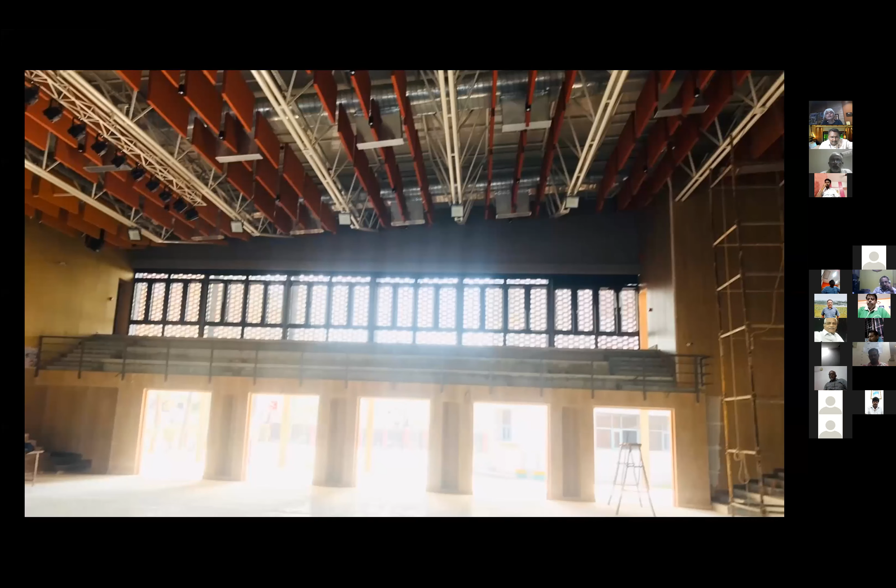This is the last project which I'm presenting. This is my own office and house building in Bangalore. Here, what we did is, it's in stabilized mud block.

Because we had to dig the basement, a lot of earth was coming out. We felt bad, and we said we will reuse the earth, make the soil stabilized mud block right here at site, and then we'll make the building out of that.

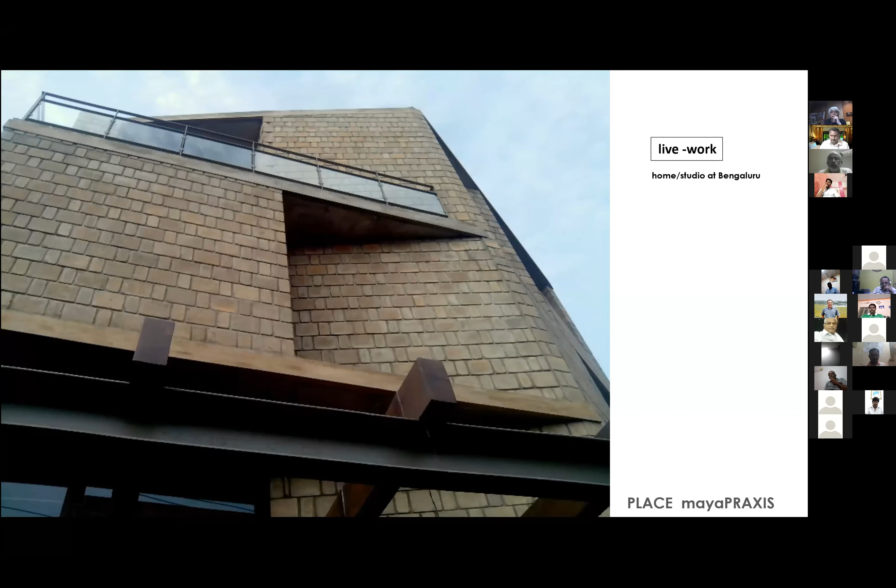Being both home and office, we did our home below and office above. Generally people would do the other way, but we realized that we are in office throughout the day. We need more light during the day, where we could do skylights and everything, proper ventilation in the office, whereas home needs more privacy, and we use it mostly in the night. So that's more insulated. Whereas the top floor, we also did a terrace garden on our terrace, so that we can make our building as cool as possible.

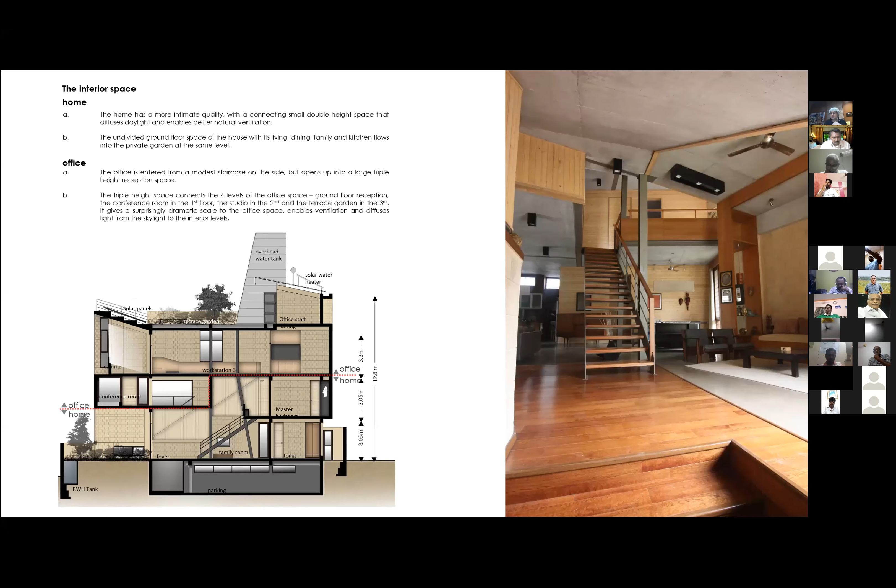So this is like basement, ground. We have a mezzanine, and then things. So I'm sure you guys must be wondering, what are all these angles? Why do they have to make these angles? These architects make things complicated.

So here, I think the idea we started and why we did it works because we just shifted the wall. We shifted the wall here so that in a small site of 40-60 in Bangalore, where one more building will come right here, if we do a window here, we look into my neighbor's wall or window. We made this wall turn so that we could do a window to the back side, which is my office or the bedroom below.

But from this window, I can actually see the whole setback and the road there. So the whole building was designed where these walls were turned to get those windows and ventilation and cross ventilation. And that's what the elevations kind of look like. That's what this turning inside and outside of these walls gave the form to the building.

Again, there was the mezzanine - you come just 6-7 feet above the garage area where you start our office. And then we have the staircase. The house staircase was put underneath the office staircase. And then this whole staircase goes all the way up to the terrace, where we have the terrace garden.

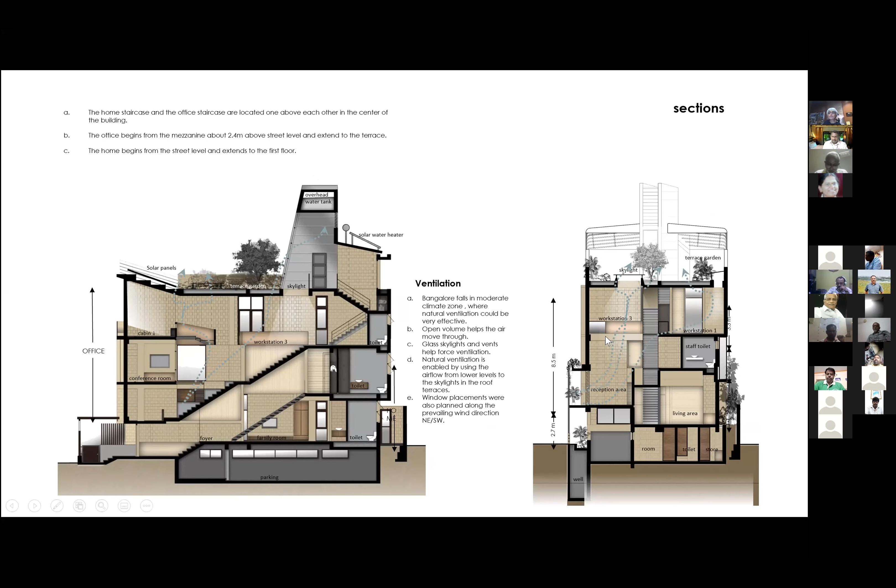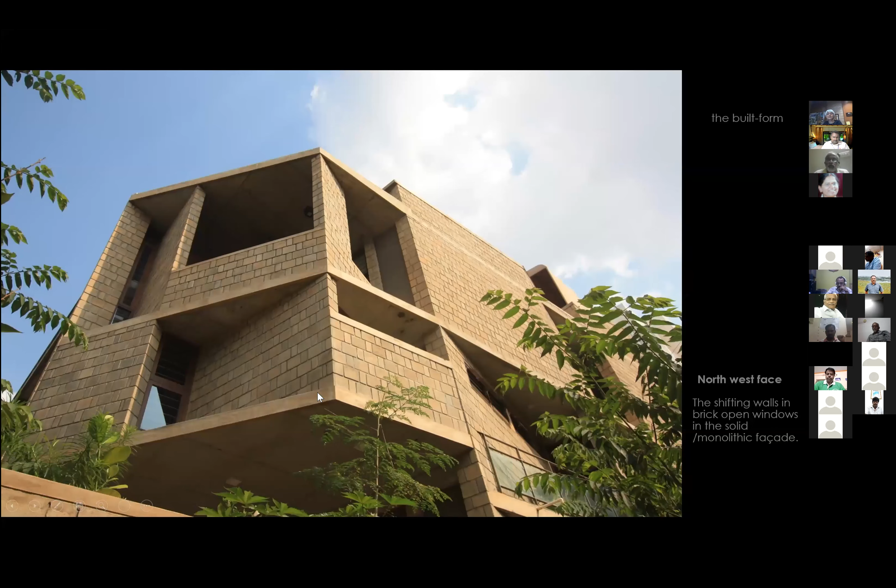And that's the space which I'm talking about - that's like an internal courtyard to our office. So you kind of enter here, and then in this 3-story space, which has this round skylight above. So yes, this is how the north west facade has very few windows on the west side, the east facade has a lot more windows, the front building.

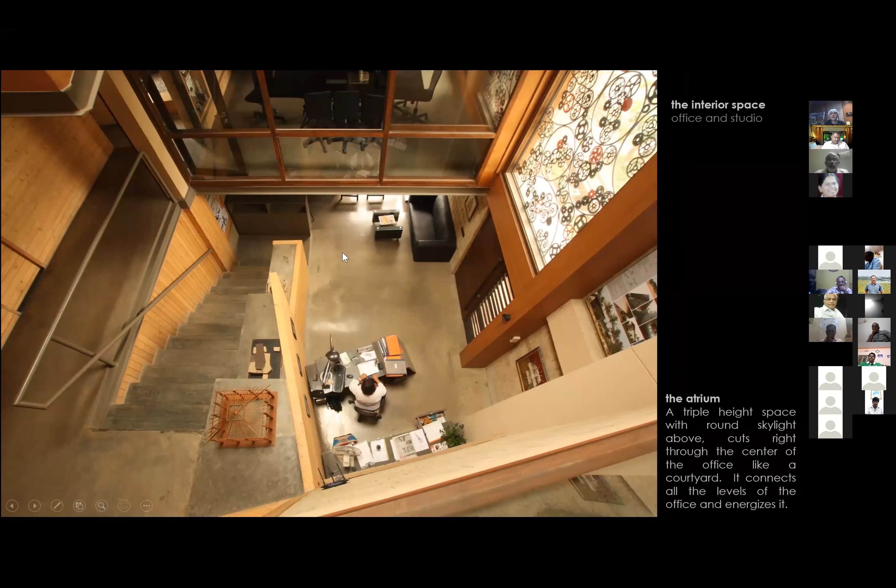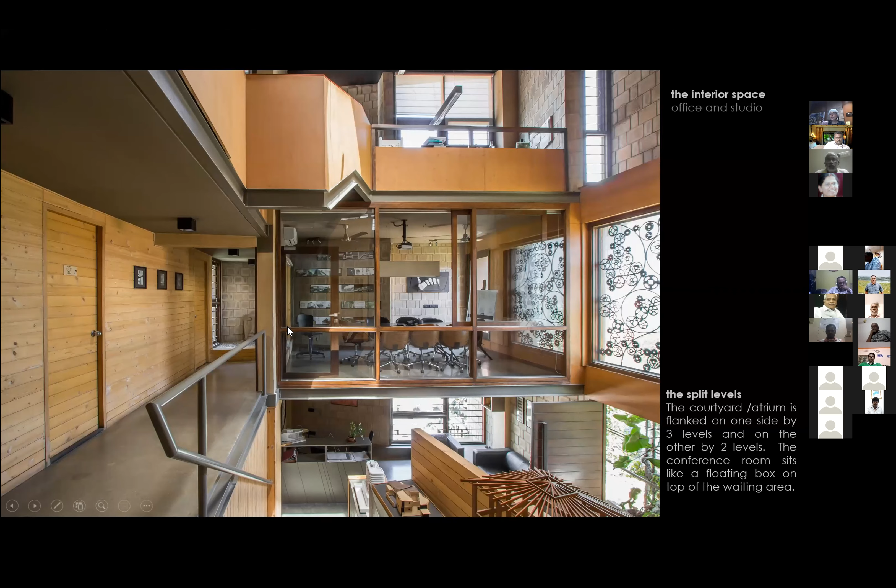I'll quickly take you on a tour of our office. We enter in this space, which is the reception. And then the staircase, we come here, take this staircase up, climb up. And our office is actually on the second floor. The first floor is only our conference room and toilets. So that's our conference room and toilets on the first floor. And half of the first floor behind here is a house.

Then that's our studio. Everything is exposed, like we have exposed brick inside, outside. We have no plaster. Actually, we made some rules for ourselves - this is a building for ourselves. We made no plaster, no paint, no sill, no lintel, no chhajja. We made these no's for ourselves, which formed a rule, and that's why the building is what it is and what it looks like.

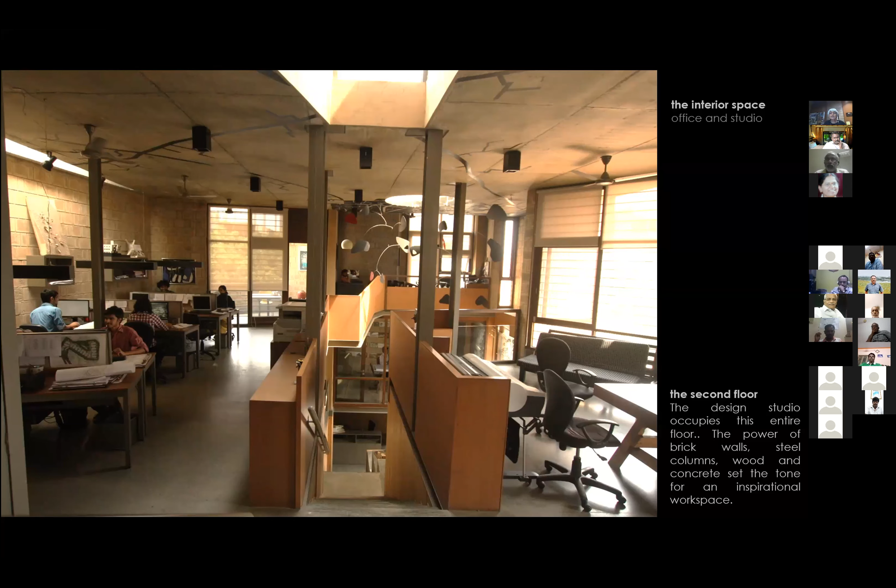The other thing we did here is if you see, actually the studio is completely open - we have no walls, all the walls are only to the outside. So all the interior columns are in steel, all the exterior columns are in masonry and walls are masonry, but all the interior columns are steel and all the interior partitions are also wood. So we worked out how we combine this masonry envelope around, which creates the thermal environment, but also how we make this open, beautiful space, which feels very light and airy.

This is how we go up to the terrace. We did some artwork on our exposed concrete ceiling above, where you enter. Around the skylight, we painted the map of Bangalore. For this 3-story space, we did scaffolding for the artist to lie down and paint it, as you saw. We created garden spaces for us to relax, and people could go out to this balcony to pick up a phone call. This is the terrace garden for our office.

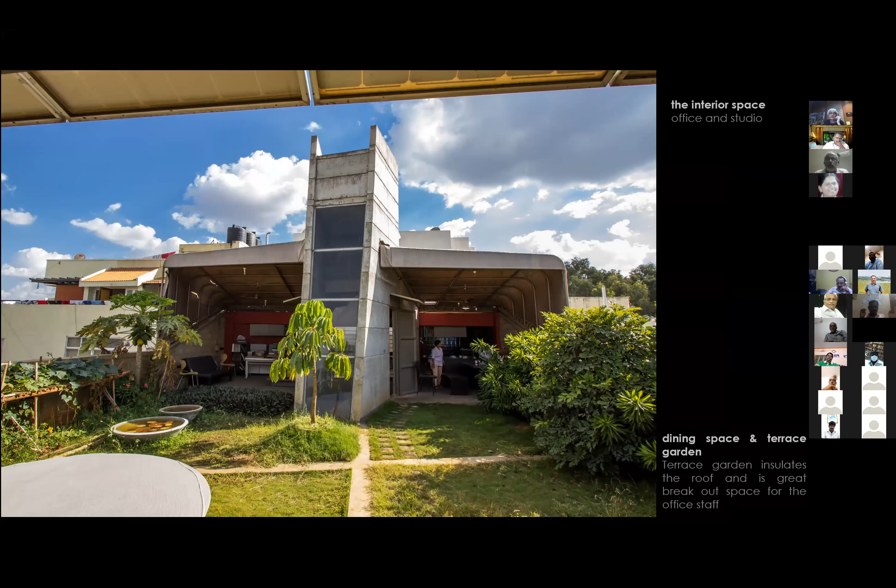We also have our home in the same building, that's on the ground floor. The material palette is pretty much the same: brick, exposed concrete, exposed brick.

All these partitions you see are completely recycled, reused pine wood. Even the doors, these huge 9-foot doors and windows, are all made with this recycled, reused pine wood. This partition is also made out of recycled wood and MDF.

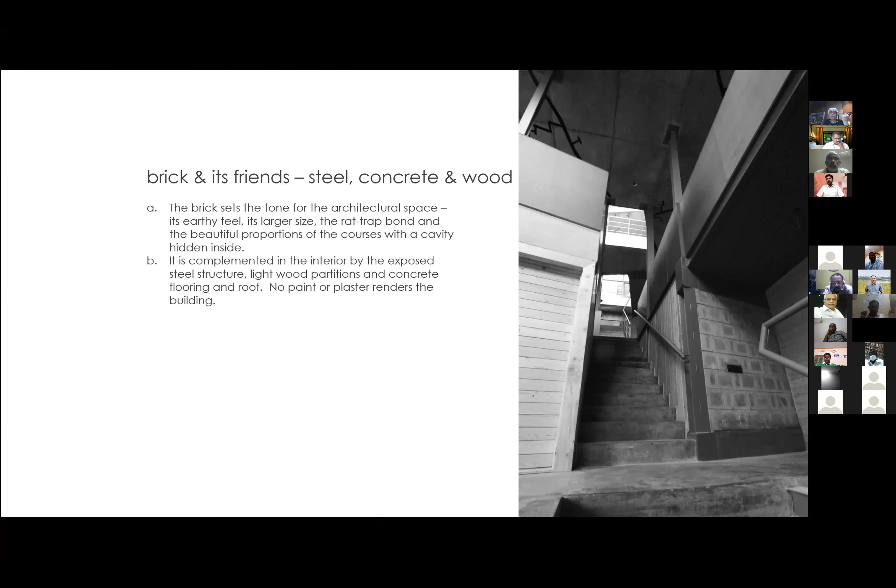It's a similar palette to what you see in the office. As I mentioned, because the earth came out during excavation, we made these blocks at the site. Then we made this rat trap bond in the soil-stabilized mud block, which gave us a cavity, since the block is 4 inches by 9 inches.

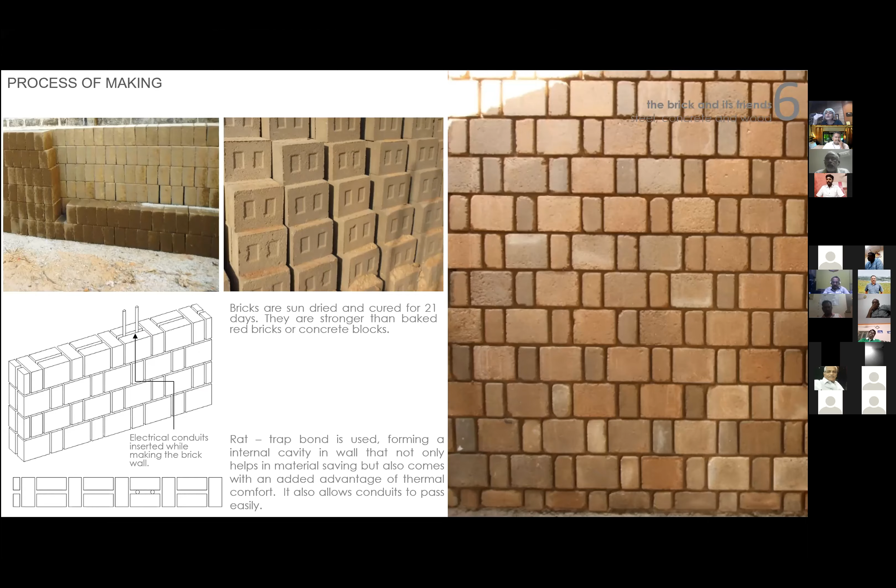That cavity is where we ran the conduits. So we actually placed the conduits before making the walls, then built the wall along with it. This meant we didn't have to chase our walls, since the walls are exposed from both inside and outside, and we didn't want the wall to get spoiled.

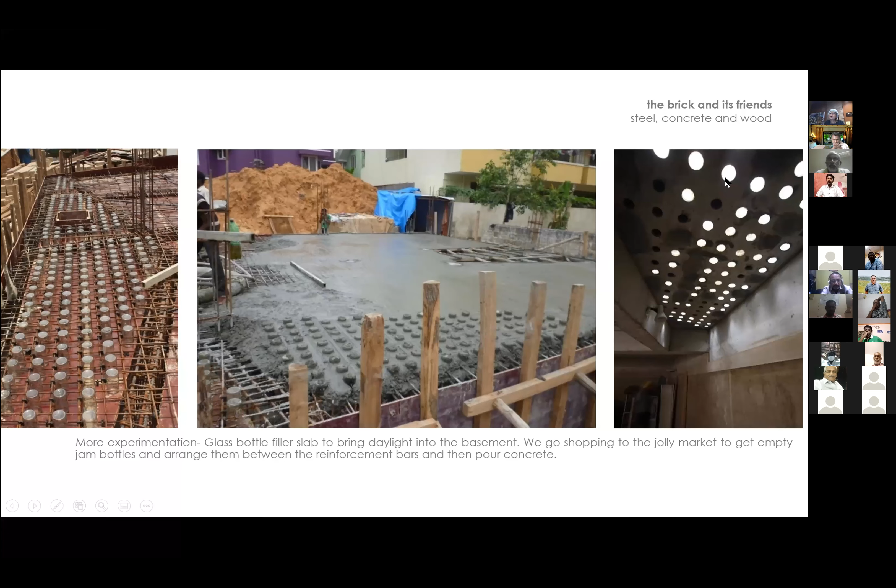This is one more thing we did for our basement. We made part of it like a veranda, and introduced these bottles into the concrete slab before doing the concreting. So we got this light filtering through these recycled, reused bottles.

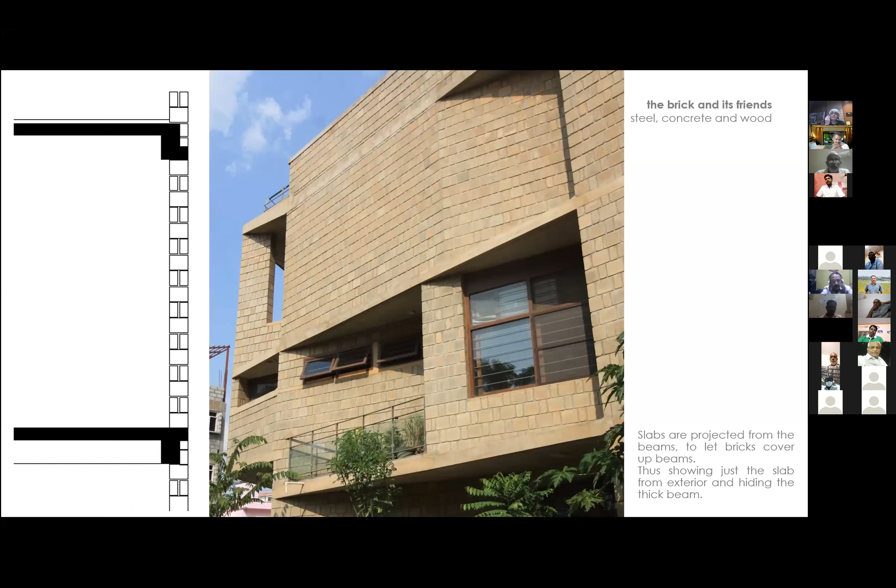Another thing - we didn't want the beams to be visible, so here the beam is half brick inside, and we extended the slab so that from outside we don't see the beams, only the slab. That gives a continuous slab line, otherwise beams of different sizes would be visible and it wouldn't look right. So yes, a lot of sustainability aspects, which I've already explained.

I think I've already taken too much time. In this building, brick is as it is, concrete as it is, wood, metal, glass. Our idea was how beauty comes from the rawness of materials and how they are put together. That was our idea, and we wanted to achieve that in this building, and I think we've been very successful.

After we finished this building, our first in stabilized mud block, we went on to do many more buildings and houses. A lot of people just come to our building and say they love it and want something similar. But before this building existed, when we tried, we were not so successful because people were not convinced. After looking at our office, it's been easier for us to convince clients to embrace this exposed rawness of material and beauty, like exposed concrete and exposed masonry.

And yes, it's not just me presenting here - all this hard work is done by the team in our office. We have about 20 people in our office here in Bangalore who work hard. So that brings us to the end of my presentation. Thank you.